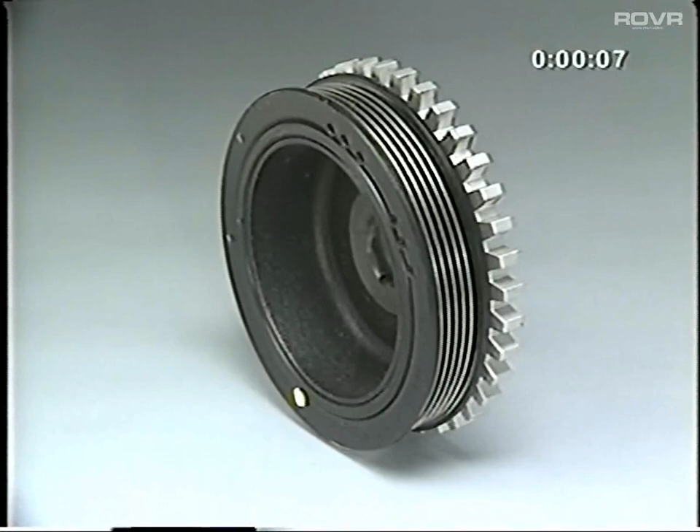The crankshaft damper assembly transmits crankshaft rotation to the serpentine accessory belt. As the damper reacts to the force of the crankshaft driving it in one direction and the load on the belt providing resistance, it tends to flex. To accommodate this flexing, manufacturing tolerances are fairly wide, plus or minus 20 thousandths of an inch in this case. With this much tolerance, a good damper may appear to walk in and out.

This amount of runout is a normal condition for 1996 and earlier 1.9-liter engines. To eliminate belt noise concerns, some techs, noticing the runout and thinking the damper's defective, replace it unnecessarily. Actually, if a belt noise concern exists and damper runout's visible, it's unlikely the two are related.

When diagnosing a belt noise concern on the 1.9-liter engine, first determine which belt is involved. If the belt noise is a squeal or a chirp, it probably originates in the front-end accessory drive system. Check belt tension for a squeal. Check pulley alignment for a chirp.

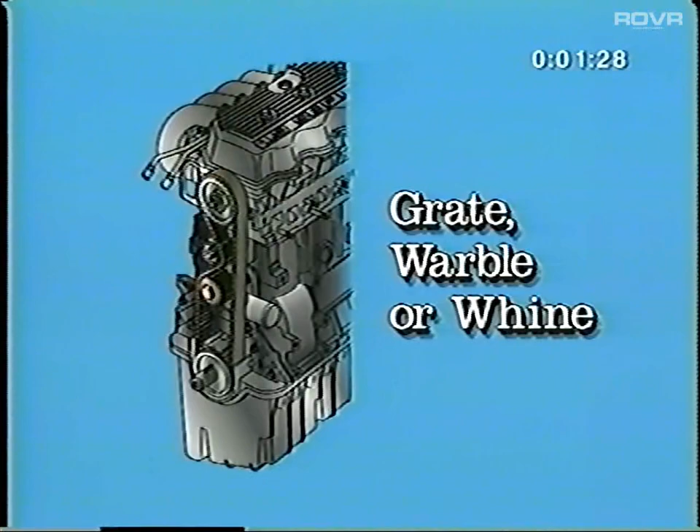If the belt noise is a grating or a warbling sound that's sometimes accompanied by clicks or slaps, or a whine that changes in relation to engine speed, it's more likely due to incorrect timing belt tension. Check the tension of the timing belt. If it requires retensioning, make the adjustment following the procedure in the vehicle service manual. To keep from pre-stressing the belt, be sure the engine's cold and at top dead center before you start.

By the way, if you're sure you're dealing with a belt noise but can't determine which one by the methods we've shown, remove the serpentine belt and run the engine. If the noise is still present, the timing belt's the source. If the noise goes away, it must originate in the front-end accessory drive system.

The timing belt on the 2-liter split-port induction engine may appear to be loose on this side when the engine stops anywhere other than top dead center. Although one might think that this amount of play means the belt needs to be retensioned or that the engine needs to be timed, neither case is true.

If you see this condition when you're servicing the 2-liter split-port induction engine and you haven't done anything to change the timing, ask yourself, was the timing okay before I started the job? If the answer is yes, it's unlikely that the timing's changed. Although it may appear to be loose, the belt is correctly tensioned and retiming the engine is not necessary.

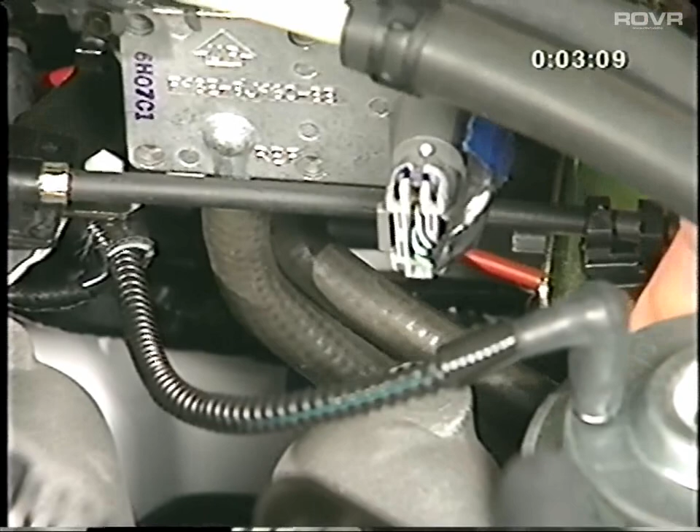The signal hoses that carry exhaust gas to the DPFE sensor have been redesigned due to a noise concern that was associated with the original design. The original signal hoses were ballooning with the exhaust pressure pulses, producing a rattling noise that sounds a lot like an exhaust leak. Typically, it's heard between 2200 and 2500 RPM under load.

New design hoses went into production vehicles on August 15, 1996 to correct this concern, and service parts are available now. If an exhaust system leak cannot be found, the source of the noise may be the original design DPFE sensor hoses. Replace them with the new design service parts, being careful not to switch the lines.

The original design PCV oil separator on the 2-liter split-port induction engine may have flexed when its fasteners were torqued during the engine build process. This flex may have created an engine oil leak. The leak is likely to be detected soon after the vehicle is sold. The customer may say he smelled hot oil or seen smoke from oil dripping on the catalytic converter. The pan rail also may be damp.

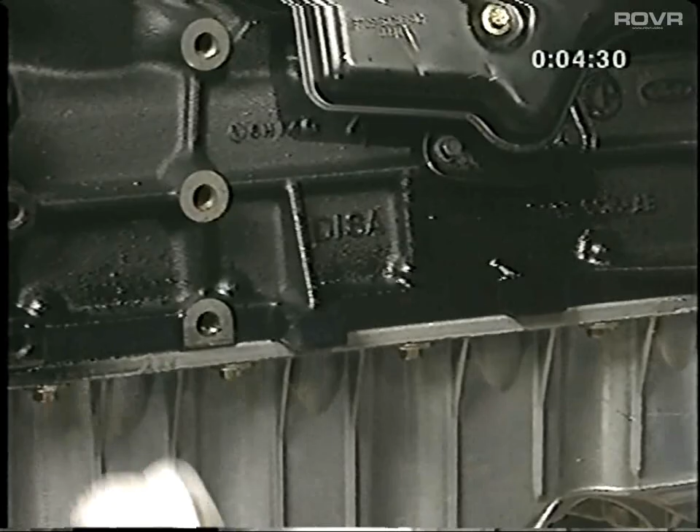The recommended way to verify this concern is to clean the engine around and below the separator. Run the engine until it reaches normal operating temperature. Then view the area with a black light. Because the break-in oil already contains a fluorescent dye, a leak will produce the characteristic fluorescent glow.

The solution to this concern is to either reuse the original part with a new gasket or to replace the part with the upgraded PCV oil separator and a new gasket. In either case, torque the assembly to 8.5 to 11 Newton meters.

The timing chain on the 2.5-liter Duratec engine in the 1995 Contour and Mystique may clatter or rap when the engine is started after a cold soak of 4 or more hours. If the noise is present, it lasts no more than a couple of seconds and has no effect on engine durability.

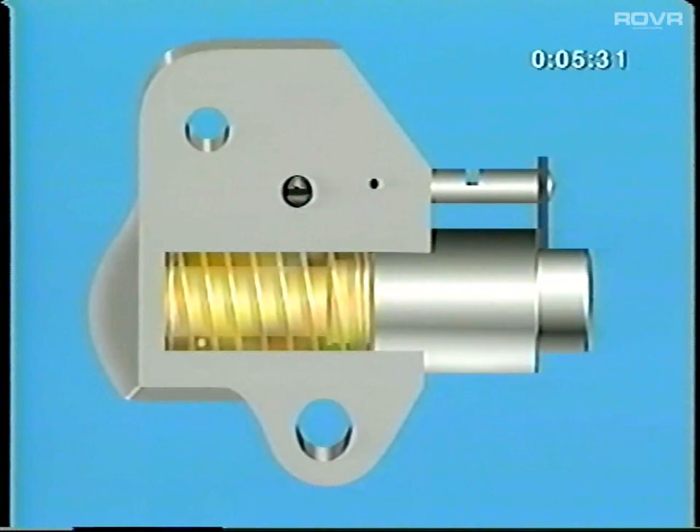The cause of the clatter is oil bleed down from the timing chain tensioners when the engine is off. The noise stops when the tensioners are supplied enough oil to operate normally.

To verify that the concern exists, allow the vehicle to sit for a minimum of 4 hours, long enough for the tensioners to bleed down. Then start the engine and listen for the noise. If it's present, it'll be heard near the front right side of the engine. When the engine's restarted, the noise will not reoccur.

To correct the condition, install the modified 1995 camshaft drive tensioners and adapter plates, and upgrade the entire camshaft drive system to 1996 level components.

The modified design tensioners are 1 millimeter thinner than 1996 level production tensioners to accommodate the thickness of the adapter plates. The cavity machined into the back of these tensioners creates an oil reservoir that retains engine oil after the engine shut off, enabling the tensioners to actuate sooner.

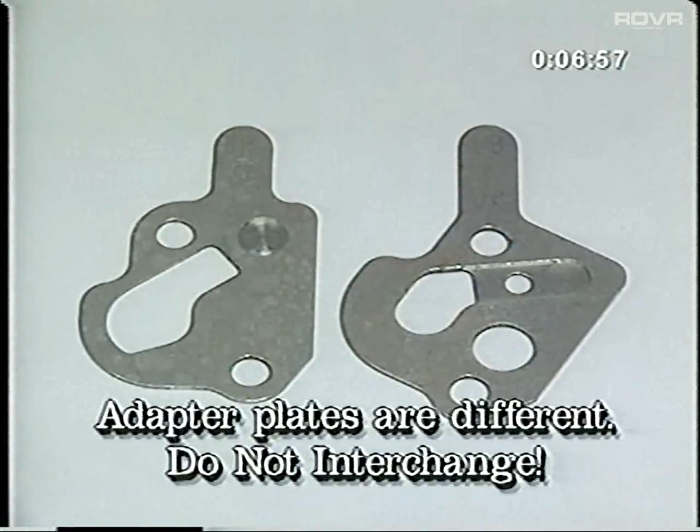To service the concern, refer to TSB Article 962513 and follow the timing chain removal and installation procedures in the 1995 Vehicle Service Manual. Also note that the left bank and right bank adapter plates are different and are not interchangeable. Refer to TSB Article 962513 to ensure correct installation.

To complete the procedure, change the engine oil and filter using Motorcraft filter FL820 or an equivalent. When the FL820S oil filter becomes available in mid-1997, use it instead of the FL820. The new and more durable silicone bypass check valve in the FL820S will reduce the likelihood of the noise coming back between regularly scheduled oil changes. Until the new design FL820S oil filter becomes available, continue using the FL820.

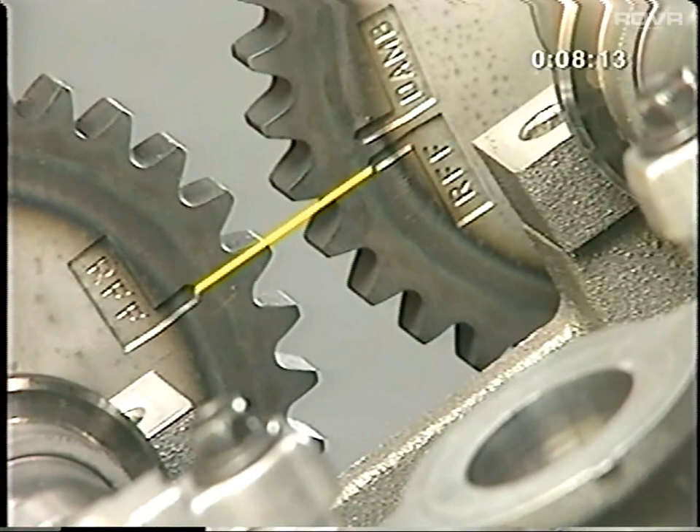The timing marks on the 2.5-liter and 3-liter Duratec engine's camshaft sprockets were changed in mid-1996 from arrows to characters, and from one set of marks to two. When setting the timing on the 2.5-liter or 3-liter Duratec engines, be sure to use the correct marks. The set marked RFF, which stands for Roller Finger Follower, is the current valve train configuration. The other set of characters is for future applications.

Thunderbirds, Cougars, and Mustangs equipped with a 3.8-liter engine and built from Job 1 through January 10, 1996, may weep engine oil around the number 4 front cover to water pump stud. The cause of the leak is the absence of sealant on the end of the stud that threads into the block. If the area around the number 4 front cover stud shows evidence of an engine oil leak, carefully remove the stud, but do not use an impact wrench.

Clean and check the condition of the stud. If it's not damaged, reuse it. If it is damaged, replace it. Apply thread sealant D8AZ19554A with Teflon to the stud and install it in the block, tightening it to 8 to 12 Newton meters, or 71 to 106 pounds inch.

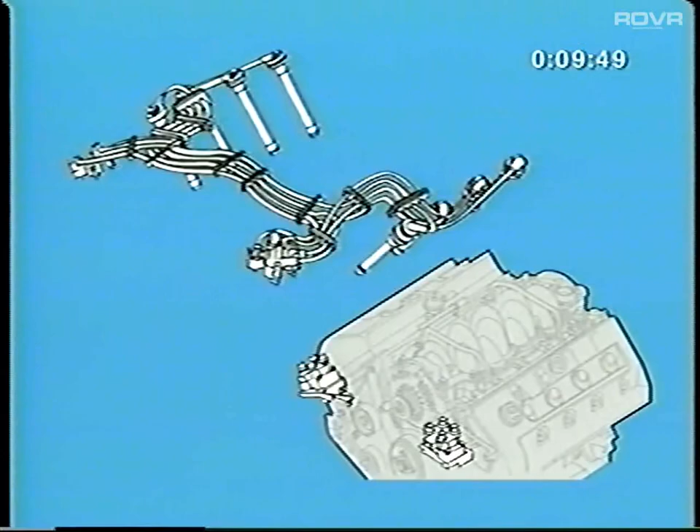The 4.6-liter 4-valve engine in the Mark VIII has changed to a coil-on-plug ignition system for 1997. The coil-on-plug system uses a separate coil to fire each spark plug on the compression stroke only. This design eliminates the coil pack and spark plug wires which are present in conventional distributorless ignition systems. By simplifying the system, Ford engineers have enhanced its reliability, reduced its weight, and improved its appearance.

With the new system come new diagnostic procedures. Although these are thoroughly covered in the PCED manual, here are some key points. If the PCM detects a misfire and identifies the specific cylinder where it occurs, it will set a misfire continuous memory code for that cylinder.

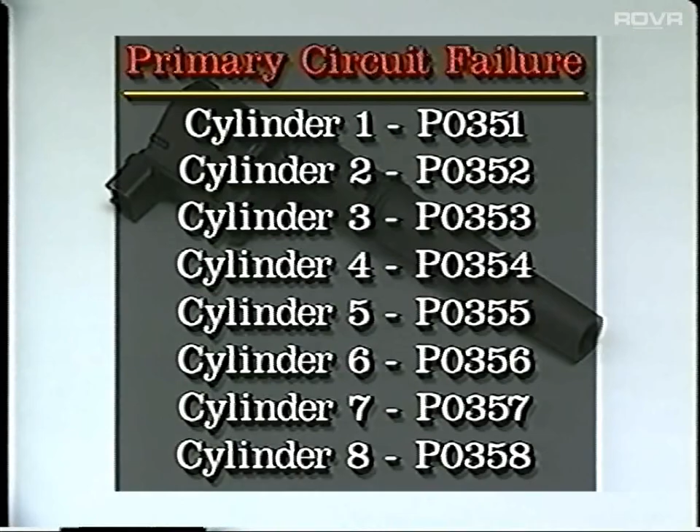These misfire codes are numbered P0301 through P0308 for the 4.6-liter 4-valve engine. If the misfire condition is random and the PCM is unable to specify a cylinder, it'll set the system misfire code P0300. The PCM also will set a separate primary circuit failure continuous memory code for any coil it determines is faulty.

These codes are numbered P0351 through P0358 for the 4.6-liter 4-valve application. The PCM will set a P0350 continuous memory code if it detects a random primary circuit failure but has not identified the specific coil.

By specifying the cylinder where a misfire has been detected or the coil that exhibits a primary circuit failure, the PCM simplifies diagnosis. The pinpoint tests in the PCED manual are written to walk you through coil-on-plug system concerns in a logical manner, whether you're dealing with a system code or a specific component.

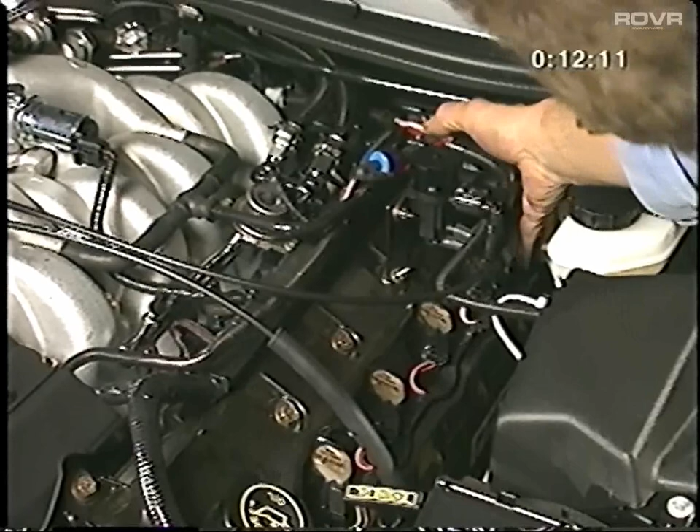For example, for diagnostic trouble code P0350, the system code for an ignition coil primary circuit malfunction, you're directed to start your diagnosis by checking the components that have the highest probability of creating the concern. These include checking the coil and boot for insulation damage, looseness, or shorting, checking the condition of the spark plugs for damage, wear, carbon deposits, and gap, and checking the wiring harnesses for damaged, burned, or overheated insulation, damaged pins, and loose or broken connectors.

If the root cause of the concern is located among these items, the defective component is repaired or replaced. The PCM is reset, and a quick test is rerun to verify the repair. If the root cause originates elsewhere, the pinpoint tests direct you to check the coil driver line and the battery line for opens and shorts, and so on, until the root cause is pinpointed and repaired.

In this segment, we'll demonstrate the correct cam timing procedure for the 5.4 and 6.8-liter engines. This procedure can be performed at the bench during a rebuild or in the vehicle after the oil pump or one or both cylinder heads have been removed. A critical requirement of this procedure is keeping the camshafts and the crankshaft in the correct relationship at all times. By performing the procedure exactly as we demonstrate, valve train or piston damage can be prevented.

Before we start, here are a couple of tips that will help make sure the job's done right the first time.

When you're ready to install the timing chains, you may find that the copper links are discolored or hard to identify. To work around this concern, here's a way to make sure the chains are installed correctly. Stretch the chain out, placing a single link in a vertical position at one end. The opposite two links will be horizontal. Mark all three with a marking pen. The single vertical link will be aligned with the crankshaft sprocket timing mark. The two horizontal links will be aligned with the camshaft sprocket timing mark.

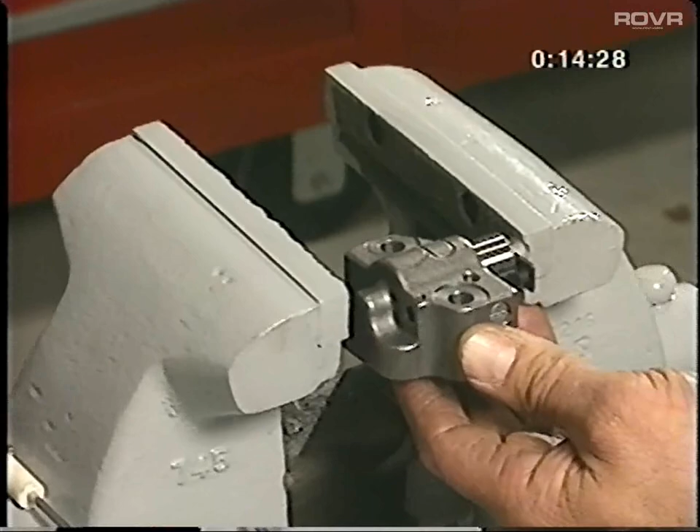With the hydraulic tensioner positioned between the jaws of a vise, but with the ratchet arm located safely outside the jaws, compress the tensioner plunger. Then, using a small screwdriver or a pick, push back and hold the ratchet mechanism. While holding the ratchet mechanism, push the ratchet arm back into the tensioner housing and install a paper clip or a similar type of pin into the hole in the tensioner housing to hold the ratchet assembly and plunger in during installation. Remove the tensioner assembly from the vise. Repeat this procedure for the other hydraulic tensioner.

Before installing the cylinder heads and camshafts, position the crankshaft keyway at the 12 o'clock position. By doing this, all of the pistons will be below the deck face, allowing you to rotate camshafts later without damaging the valve train or pistons.

After installing and torquing the heads, loosely install the camshaft holding tools on both camshafts. Using the camshaft positioning tool, position the left cam sprocket timing mark roughly at 12 o'clock and tighten the camshaft holding tool. Position the right cam sprocket roughly at 11 o'clock and tighten the holding tool. If the camshaft holding tools are not locked while the timing chains are installed, valve spring tension could cause one or both sprockets to jump time after the chains are installed.

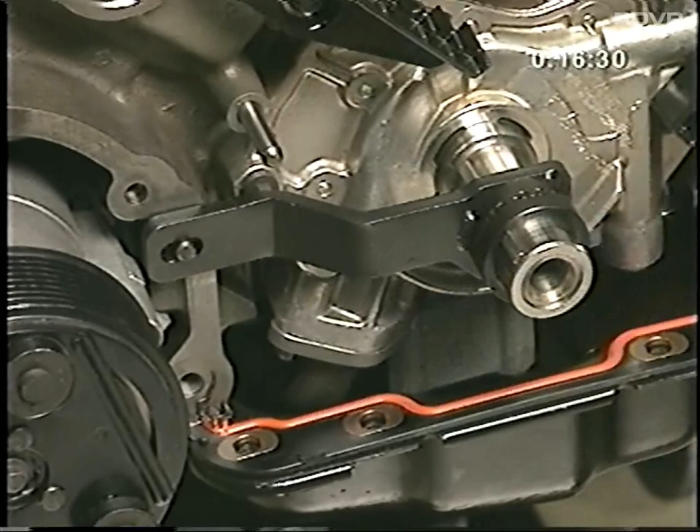Next, install the crankshaft tool by sliding it on the keyway. Then install 2 or 3 flywheel bolts in the crankshaft rear flange and, using a pry bar, rotate the crankshaft 1/4 turn only in a counterclockwise direction as viewed from the front of the engine. Stop rotating the crankshaft when the slot in the crankshaft tool is aligned and fits over the dowel on the block. If the crankshaft is rotated more than 1/4 turn in the direction shown, or if it's rotated in the opposite direction, piston and valve train damage will occur.

Remove the crankshaft tool, but don't disturb the crankshaft position from this point on. Next, position the inner crankshaft sprocket on the crankshaft with the long hub out.

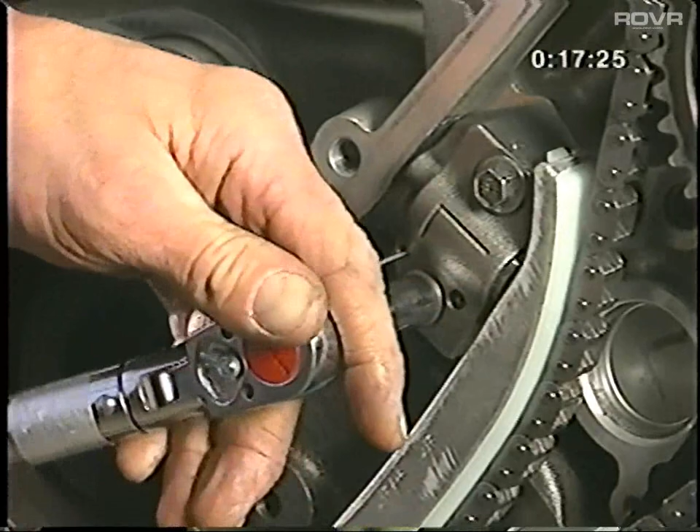Install the left-hand timing chain on the left camshaft sprocket, aligning the single copper link with the timing mark of the crankshaft and the two copper links with the camshaft sprocket mark. When the left-hand timing chain is correctly installed, the upper half of the chain will be located below the tensioner guide dowel, and the timing marks will be aligned with the appropriate copper links in the timing chain. To complete this side, install the timing chain guide and the hydraulic tensioner.

Now, without changing the position of the crankshaft, install the outer crankshaft sprocket with the long hub facing in. Install the right-hand timing chain, again aligning the three copper links with the timing marks, and be sure the bottom half of the right-hand timing chain is installed above the dowel. After installing the timing chain guide and the hydraulic tensioner, remove the camshaft holding tools.

Check your work. Verify that all timing marks are properly aligned and turn the engine over a couple of times. This will ensure that the timing chains haven't jumped the sprockets and that the engine isn't binding or sticking.

Intake manifold runner control systems are popular with our customers for the enhanced engine performance they deliver. For this and other reasons, more engines are being upgraded to electrically controlled IMRC systems, including the 1997 2.5-liter Duratec in the Contour and Mystique and the 4.6-liter 4-valve engine in the Mark VIII.

The PCM controls IMRC actuation based on engine speed and throttle position. The IMRC valve plates typically remain closed at engine speeds below 3,000 RPM to improve low speed and cold engine performance. They typically open at engine speeds above 3,000 RPM to improve high-speed engine performance.

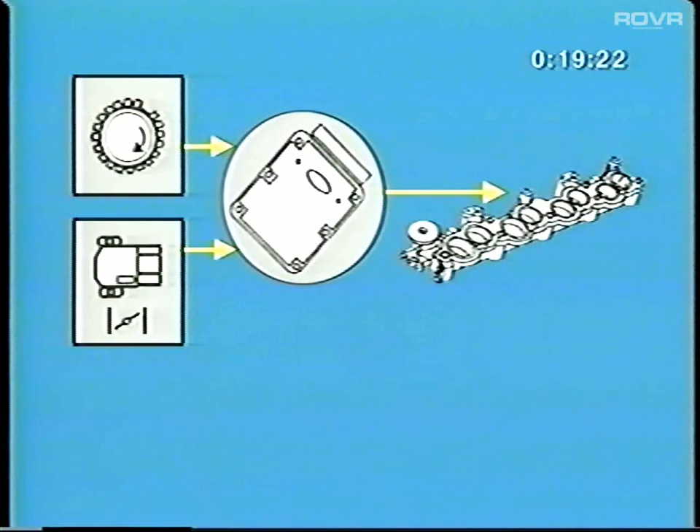Because an IMRC that fails to function correctly may adversely affect emissions, it is subject to OBD2 requirements. For this reason, the IMRC is equipped with an internal monitor switch that provides feedback to the PCM. Diagnostic trouble codes will set, and the malfunction indicator lamp will illuminate if the PCM detects the valve plate stuck open or stuck closed. Other diagnostic trouble codes will be set, but the MIL will not light if an open or short is detected in the IMRC circuitry or if the monitor switch signal is out of range.

In addition to the change to an electrically actuated IMRC, the 1997 Mark VIII is equipped with a center entry throttle body. It's similar to the throttle body on the 4.6-liter four-valve engine in the Mustang. To learn more about the intake manifold runner control and other intake air systems and how to diagnose concerns related to them, refer to the system descriptions and pinpoint tests in the PCED manual.

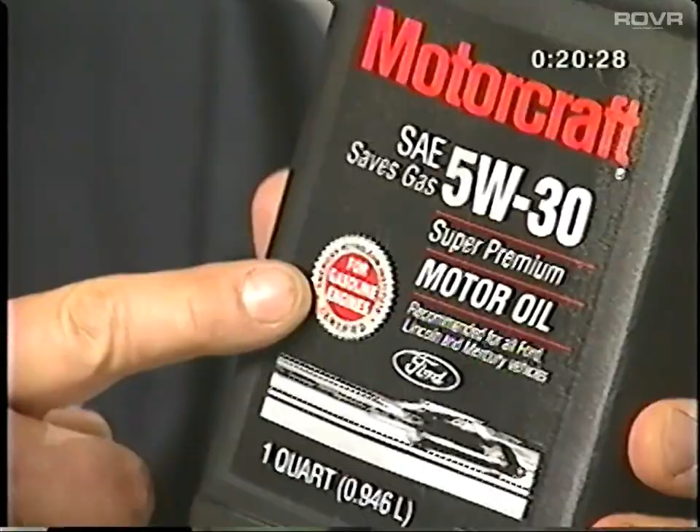The hurdle that petroleum refiners must meet to earn the API certification mark has been raised. The combination of tougher standards plus new refining technology is resulting in the production of base oil stock that's so pure, it's as clear as water.

The impurities which are present in conventional refined base oil stock cause lubricants to degrade. By removing the impurities, refiners have developed petroleum-based lubricants that exhibit synthetic-like characteristics. When blended with the required additives, the base oil stock takes on the color, texture, and smell of conventional lubricants.

The standards the new engine oils must meet include improved fuel efficiency, resistance to foaming, improved low temperature viscosity, improved volatility, and emission system protection. To make sure you're getting the best oil for your engine, insist on a product that carries this certification mark.

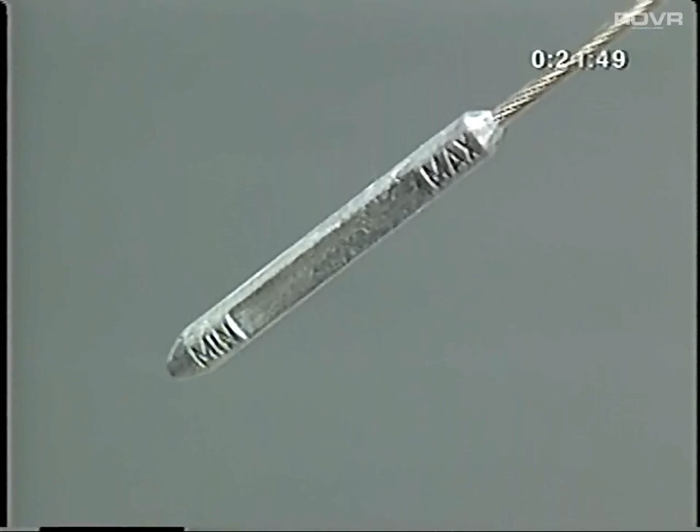Ford is standardizing the markings on its engine oil dipsticks. Although there are several styles now, there'll be just one in 1999. The new dipsticks have min and max markings only. When the oil level is at the min mark, only 1 quart can be added. If the oil level is between the marks, oil should not be added.

Adding oil when the level falls between the min and max marks may overfill the crankcase, causing foaming and potential camshaft bearing damage. When you're checking the oil on an engine equipped with a cable and bullet dipstick, wipe it thoroughly, especially the flat area. Although some oil will adhere to the outside of the bullet when you withdraw the dipstick, the marked flat surface will be partially dry.

The new min and max marked dipsticks were introduced on the 2-liter Zetec and the 2.5-liter Duratec engines in Contour and Mystique for 1995. You'll find them in the 1996.5 5-liter Explorer engine and in the 1997 4.6-liter 2-valve engine in the Crown Victoria, Grand Marquis, and Town Car.

Although the cooling systems for the 2-liter Zetec and the 2.5-liter Duratec engines don't appear much different than the conventional systems we grew up with, they are unique. Each is an example of a DeGas system, a design that's fully pressurized, including the coolant recovery or DeGas bottle.

To help you understand how a DeGas system differs from a conventional cooling system, two things need to be cleared up. The first is how the system removes air from the coolant. The second is the misconception that the DeGas bottle is merely an overflow container.

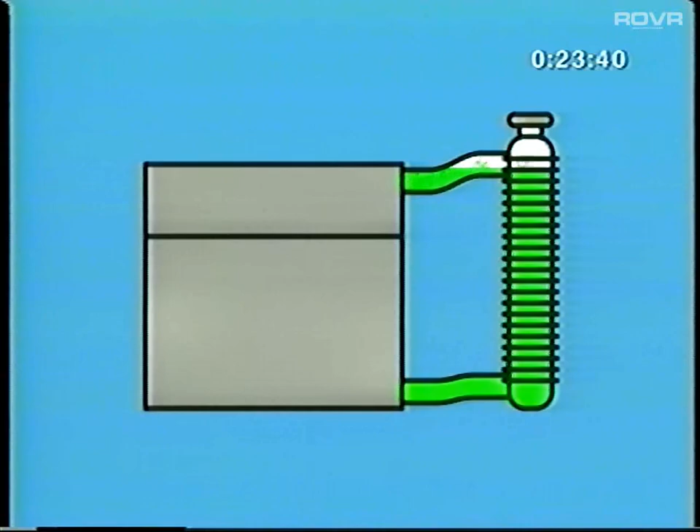When the top of the radiator is the high point in the cooling system, air bubbles in the coolant collect there and vent through the cap. In many of today's vehicles, however, some of the coolant passages in the engine are higher than the radiator. If there were no way to remove air from the engine, it would be trapped, reducing cooling system efficiency.

The DeGas system gets the bubbles out by continuously purging air from the cylinder block and circulating air-free coolant back to the engine. This promotes effective cooling by keeping a solid wall of coolant in contact with the cylinder walls at all times.

A conventional overflow system only works when the engine's off, allowing hot liquid to escape from the radiator and return when cooled. None of this back and forth flow takes place in a DeGas system. The DeGas bottle is an integral part of the cooling system while the engine's running. The coolant must flow to the bottle to release air bubbles before it's permitted to re-enter the coolant stream.

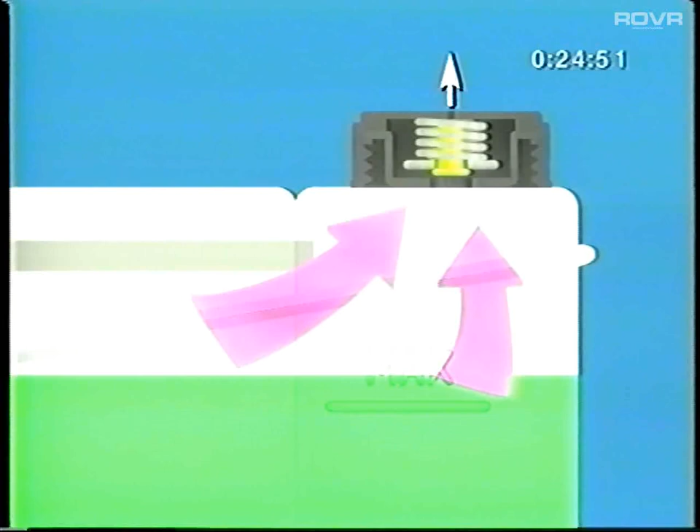Immediately after the engine shuts off, coolant temperature spikes briefly. The added system pressure opens the pressure valve in the fill cap and vents air to the atmosphere. As the coolant temperature drops, the air pressure in the DeGas bottle decreases. In response, the greater pressure outside the bottle forces air into the bottle through the vacuum valve in the fill cap. To operate correctly, the DeGas system requires this cushion of air above the coolant.

If the bottle's overfilled, liquid may vent after the engine's shut off. If the level's too low, overheating concerns may develop. When servicing a DeGas system, be sure to heed the warnings in the vehicle service manual. The coolant is extremely hot, as high as 230 degrees Fahrenheit at the DeGas bottle.

To prevent cooling system concerns, be sure the coolant level is between the min and max marks when the engine's cold. Tighten the fill cap to 4 Newton meters torque. That's hand tight. A loose cap may be the cause of an overheat concern. And verify that the fan works properly at both low and high speeds.

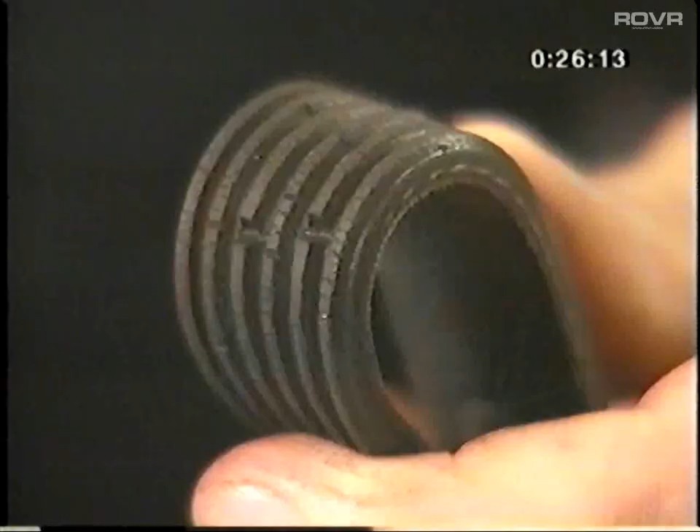Serpentine accessory belts are often replaced when they have plenty of life left in them. Here are some tips to help you determine when a belt should be replaced. Do not replace belts that have cracks across the ribs. Although the cracks may appear at less than 50,000 miles under severe operating conditions, they neither weaken the belt nor interfere with its performance.

Do replace a belt if it's missing chunks of rib material as long as 5 millimeters or 19/100ths of an inch. These are signs of belt failure. When in doubt, check the belt cracking, chunking, and wear guidelines in the vehicle service manuals.

The 1997 E4OD automatic transmission features a number of changes. The first of these is a cooler bypass valve, or CBV, that's present on F-150 and F-250 light trucks under 8,500 GVW, and on all Expedition and Econoline equipped with E4OD transmissions. The cooler bypass valve was added to achieve faster fluid warm-up during cold weather operation.

Although some of the transmission fluid still travels to the cooler, a portion is diverted back into the unit by the cooler bypass valve, helping achieve faster warm-up. When servicing the valve, follow the procedures in the vehicle service manual. The CBV assembly should be removed and backflushed during an overhaul to remove contamination.

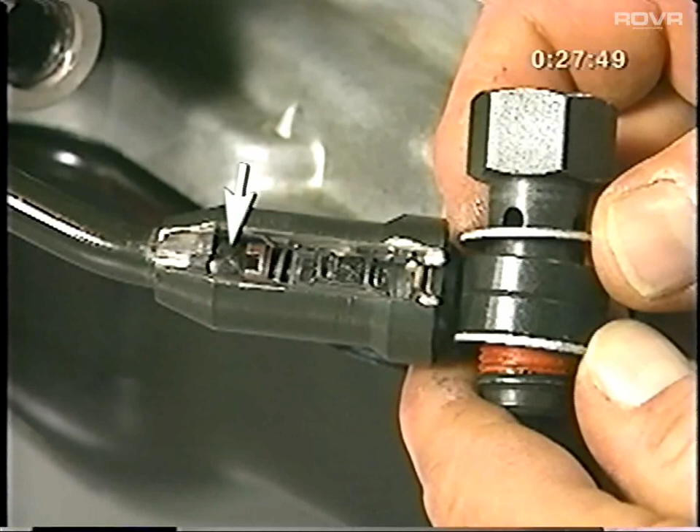To overcome the tension of the internal check ball and allow fluid to pass through the valve, regulate solvent pressure to at least 344.75 kPa or 50 psi.

Also note that the rubber-coated aluminum sealing washers can fall off the valve. Clean and inspect these washers and replace them if they're damaged. Avoid over-tightening the fittings when reinstalling the valve on the transmission. Over-tightening can damage the rubber-coated washers and may strip the case threads.

If replacement of the entire CBV assembly is required, remove the O-rings and shipping caps before installation. Another change that applies to all 1997 and some late 1996 model applications is the number 10 thrust bearing and forward ring gear hub.

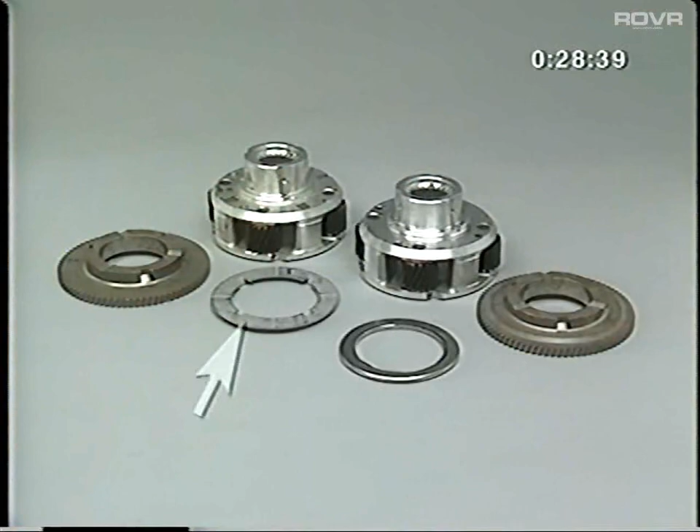The thrust washer that was present between the forward planet assembly and the forward ring gear hub in past units has been replaced with a needle bearing. To accommodate the needle bearing, the forward ring gear hub was changed as well. The slots in the forward planet carrier that held the thrust washer in place were also removed.

When servicing these components, Service Kit F7TZ-7B067AB can be used. This kit contains one number 10A needle bearing, one mating forward ring gear hub, and an instruction sheet. Make sure both parts in the kit are used. Old and new design components cannot be mixed. This kit, which should be available soon, will service any E4OD transmission regardless of which forward planet carrier design is used.

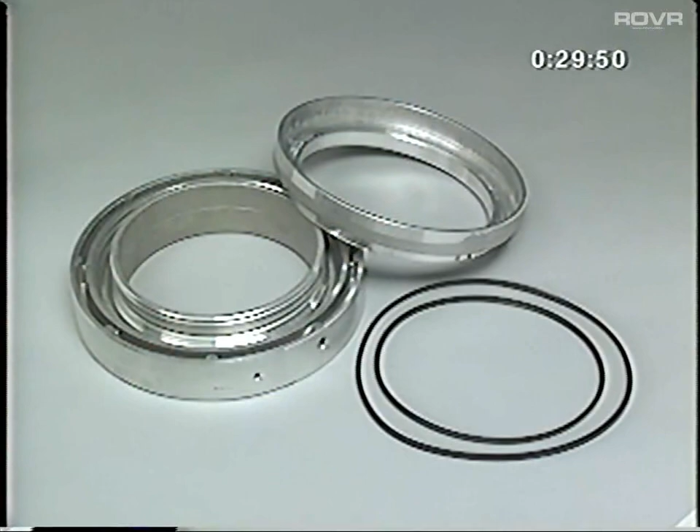Another across-the-board change for 1997 is a new design overdrive piston and cylinder. This change will occur as a running change sometime during the 1997 model year. In past models, the piston had separate inner and outer lip seals. The new design has a one-piece seal that is bonded to the piston. The cylinder design changed to accommodate the new piston design.

Avoid mixing parts when servicing the overdrive clutch. The old design and new design pistons and cylinders are not interchangeable. Refer to TSB Article 962115 until these changes are fully incorporated into the 97 models.

Some 1997 E4OD transmissions and a small number of 1996 units contain a new design overdrive ring gear and retaining rings. This also will be a running change sometime during the 1997 model year. The thick center shaft retaining ring is replaced with a thin wave ring. The thick one-way clutch retaining ring is replaced with a thin flat ring. The new ring gear has a lead-in chamfer to simplify center shaft installation.

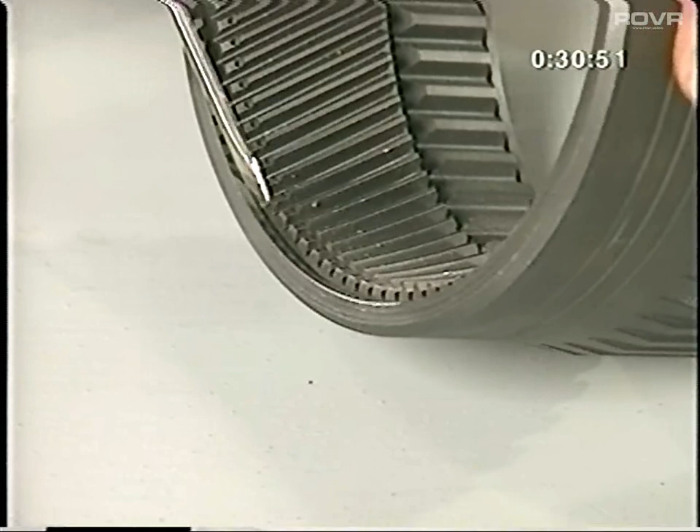Refer to TSB Article 962117 until these changes are fully incorporated into the 97 models. To prevent misbuilds when any one of these components needs to be replaced, replace all three components with the correct current level parts. The new ring gear, when purchased, will come with the new style retaining rings. Make sure the rings are properly seated in the grooves, otherwise a repeat repair will occur.

Another change to many 1997 E4ODs is the presence of a digital transmission range sensor and accompanying changes to the manual shaft and outer lever. The digital TR sensor will not retrofit to prior model year transmissions. The new one-piece manual shaft and outer lever, although similar to the 89 through 92 style, is not interchangeable with them.

The E4OD changes we just covered are also presented in the program booklet. The application chart shows which of the enhancements is present in applications based on gross vehicle weight and vehicle line. Refer to the booklet when you're servicing a 97 E4OD to avoid misbuilds.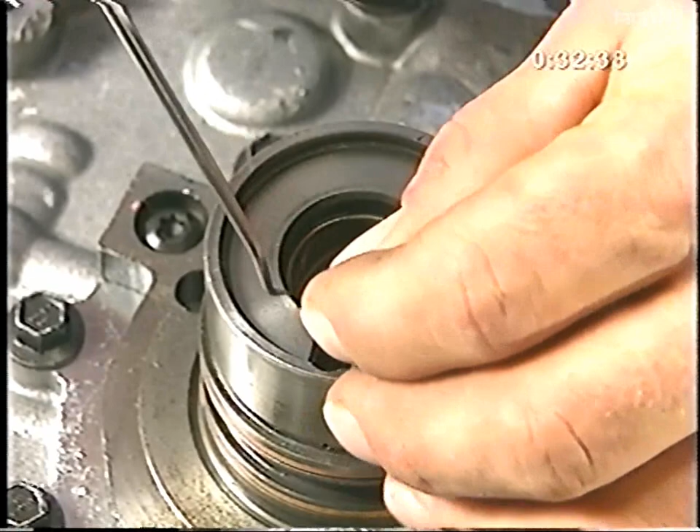To complete the discussion of the E4OD, here are several reminders about topics that recently appeared as TSB articles. E4OD transmissions are equipped with a converter drainback spring and stop assembly in the stator support of the pump control body. This spring and stop assembly must be replaced during an overhaul. Failure to do so may lead to a repeat repair.

The spring can act like a filter, trapping contaminants suspended in the fluid. With enough buildup, the flow to the coast and overdrive systems may be restricted. Symptoms include heat distress on the overdrive planetary gear set, the coast clutch cylinder bushing, or the overdrive cylinder bushing.

The converter drainback spring and stop assembly and the required orifice cup plug are currently available in kit number E9TZ-7H132B. It will also be added to the E4OD soft seal kit part number FOTZ-7153A in the near future.

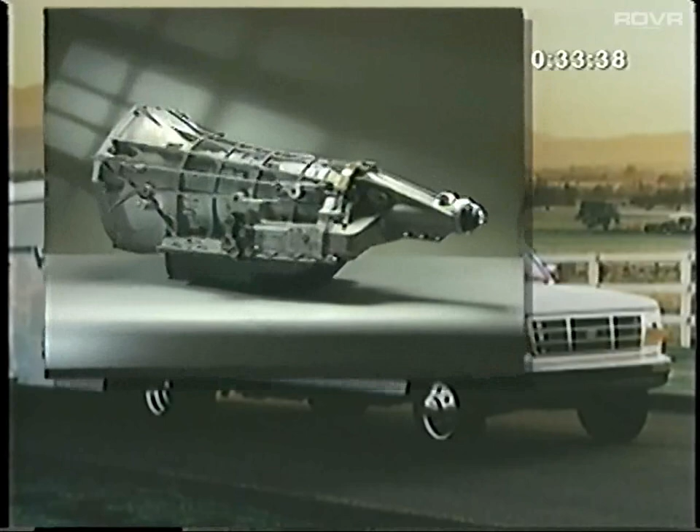E4OD transmissions built after August 7, 1995 contain a new design intermediate band apply servo assembly, part number F6TZ-7D021A. The new assembly will service all past and current E4OD transmissions.

When the intermediate band apply servo assembly needs to be replaced, exercise caution to prevent mixing parts. To use the old design in a new transmission, the case must have a groove for the retaining ring. If there is no retaining ring groove in the piston bore, only the new design assembly can be used.

When replacing the old design with the new assembly, do not reuse the old retainer and retaining ring. They're not needed. To remove the new design, gently tap on the piston rod protruding from the top of the piston with a rubber or plastic mallet. The spring load from the tap will pop the servo assembly up enough to be removed.

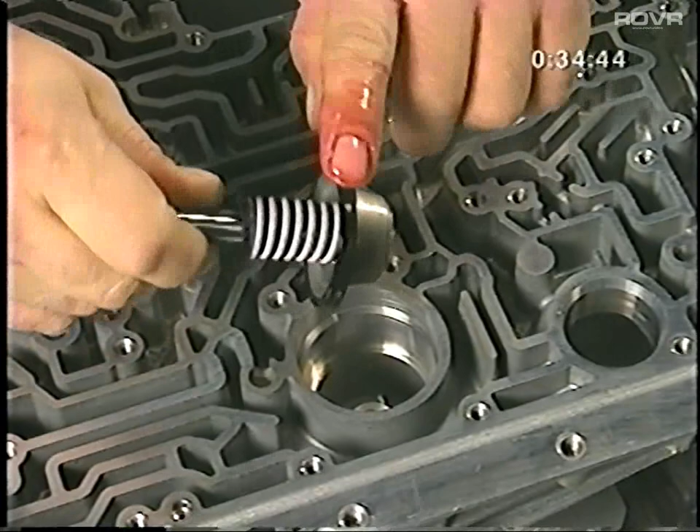To install the new design, lubricate the piston seal with transmission fluid and slide the servo assembly into the case bore until the assembly is just below the top of the bore.

TSB Article 96728 provides information that will assist you in selecting the correct components when servicing the reverse clutch piston.

The 1996 model year changes included the addition of a wave plate spring to the reverse clutch pack, a change in the depth of the reverse clutch piston to accommodate the wave plate spring, a change to the retainer and spring assembly also to accommodate the wave plate spring, and a change to the inner and outer piston seals from square cut to lip seals. These parts are not interchangeable with past models due to accompanying calibration changes.

To prevent a misbuild when replacing any reverse clutch component, refer to the part usage chart in TSB Article 96728 or in the program booklet.

The 1997 CD4E transaxle contains a new crimp nut designed park lever assembly and a redesigned park pawl ratchet spring that's blue in color. The new ratchet spring can only be used with the new park lever assembly.

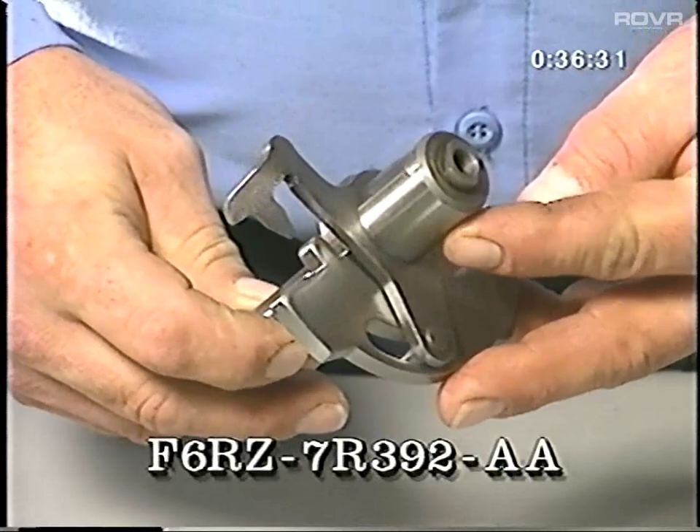If the park lever assembly in a 1997 CD4E transaxle needs to be replaced, install the crimp nut design assembly, part number F6RZ 7R392AA. The components that comprise the assembly cannot be ordered individually.

If the spring also needs to be replaced, install the blue park pawl ratchet spring, part number F7RZ 7A180AA. These components will not retrofit to earlier model year CD4E transaxles, nor will earlier model components function correctly in a 1997. Additional information on this topic is included in the booklet that accompanies this tape.

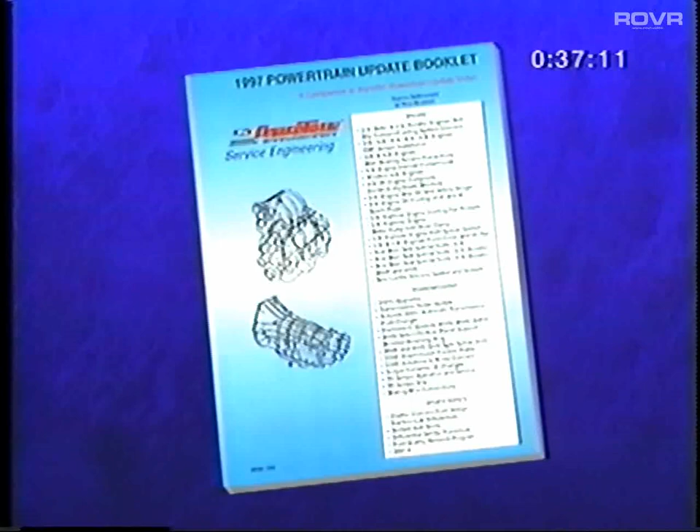Also beginning with the 1997 model year, the CD4E transaxle contains a new design main control assembly, part number F7RZ 7A100AA. This new design includes a new intermediate overdrive accumulator valve plug, but is no longer equipped with a pull-in control valve, spring, and retaining plate.

If replacement of the main control assembly is required on a 1997 CD4E transaxle, service it with the new design assembly only. This assembly cannot be used on earlier model year vehicles because it's also accompanied by changes to the intermediate overdrive servo assembly and PCM.

The CD4E in the 1997 Probe contains a new design one-piece intermediate overdrive servo piston and rod assembly and a redesigned intermediate overdrive servo piston return spring assembly that's green in color.

If the intermediate overdrive servo piston and rod assembly in a 1997 CD4E transaxle requires replacing, service it only with the new design select fit piston and rod assembly. Instructions for determining the correct select fit assembly are provided in the program booklet.

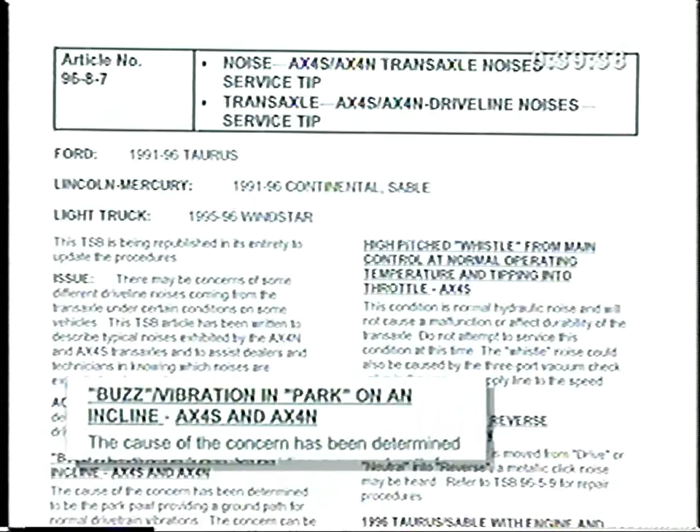Although some driveline noises are symptomatic of component failure, wear, or misadjustment, others are normal. The customer needs to know that. TSB Article 9687 describes noises which may be exhibited by AX4S and AX4N automatic transaxles. It was published to help you know which noises are normal and are to be expected.

We've reprinted TSB Article 9687 in the booklet that accompanies this tape and added another noise concern too, a clunk in Windstar vehicles. The clunk may be heard when the transaxle is shifted out of park when the vehicle's parked on an incline. The clunk occurs when the weight of the vehicle is taken off the park pawl.

To learn more about servicing AX4S and AX4N noises, refer to TSB Article 9687 and the program booklet. You'll find that a number of noises are either normal or should not be serviced at this time.

A number of 4x4s equipped with AODE, 4R70W, C6, or E4OD automatic transmissions may develop a transmission fluid leak from the extension housing into the transfer case due to the failure of the original transfer case input shaft seal. To see which vehicles may be affected by this concern, check the list in the program booklet.

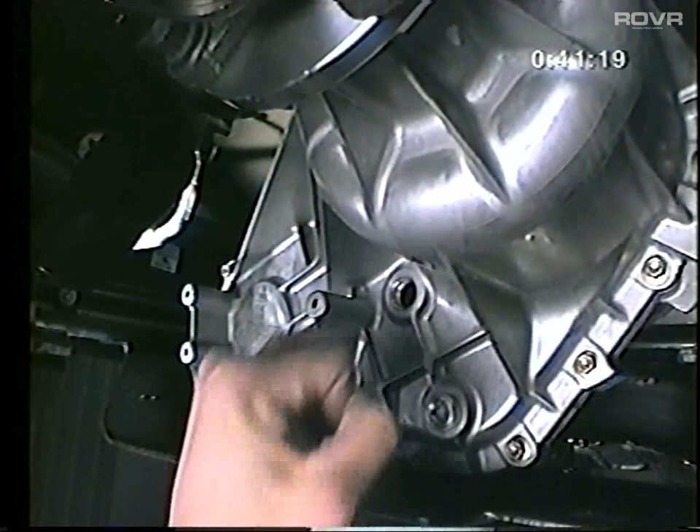The customer may report a drop in transmission fluid level or shift or engagement concerns. To diagnose the concern, check the fluid level in the transmission. If the fluid's low and there are no visible leaks, check the transfer case fluid level. It should be just below the fill plug hole.

If the transfer case is over full and the transmission fluid's not burnt, remove the transfer case and install the new double lip design seal, part number F77Z 7B215AA. Loctite's not required with this seal.

If the transmission fluid is burnt, repair the transmission as required and then replace the transfer case input shaft seal. When finished, adjust the fluid levels in both the transmission and the transfer case.

A new case and main control are available to service certain 1992 through 1995 AODE and 4R70W automatic transmissions. When servicing an existing unit with either a new case or a new main control, the correct pilot sleeves and bolts must be installed to prevent a misbuild.

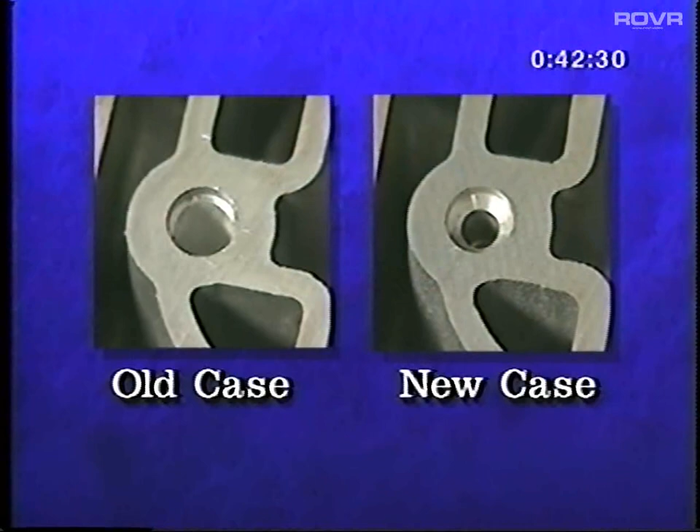The new transmission case pilot holes are smaller to match the smaller pilot bolts used in the new service main control. When replacing only the case and reusing the original main control, replace the original pilot bolts with small-tipped N808962S bolts and gasket number F6AZ-7C155A.

Use the large-tipped pilot bolts to assemble the main control. They align the separating plate and the valve body gasket. After the main control is assembled, remove and replace the large-tipped pilot bolts with the new bolts. The reinforcing plate and separating plate bolts will keep the components aligned.

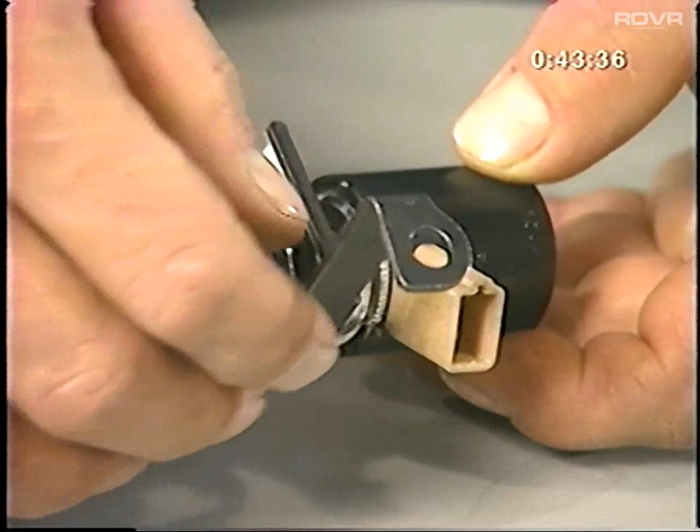When replacing only the main control and reusing the case, install sleeves F6AZ-7K720A in the main control pilot holes. And remember to install the new EPC solenoid retainer, part number F6AZ-7H111A. The necessary parts are all listed in the parts catalog.

1997 F-150 4x2s equipped with 4R70W transmissions may develop a transmission fluid leak from the extension housing to case joint when equipped with the original paper gasket. The leakage may be misdiagnosed as a fluid pan gasket leak and lead to unnecessary pan gasket replacement and a repeat repair.

The cause of the concern may be the load that's placed on the extension housing to case joint by this exhaust system bracket. When servicing a vehicle for this concern, replace the original gasket with the new steel-backed gasket, part number F6AZ-7086A. The silicone bead around its edge provides improved sealing.

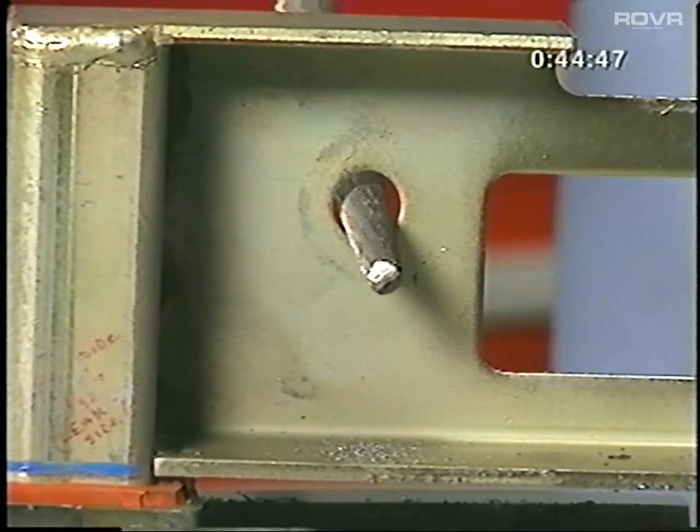To avoid preloading the extension housing to case flange joint and provide clearance for the extension housing mount bolt installation, you can enlarge these holes as much as 1/8 inch at the front and rear before installing the bracket. When reassembling the bracket, tighten the nuts on the exhaust system end first. Then install and tighten the through bolts to the extension housing mount flange.

Due to a limited supply of service main controls for the AODE automatic transmission, you may be unable to obtain the valve body that's specified for the unit, part number F2UZ-7A100A. If you must replace the main control on a 1992 or 1993 5-liter Econoline, install the F-Series valve body, part number F1TZ-7A100B, to prevent a vehicle down concern.

Make sure to use the correct gasket, since using the wrong one may cause shift concerns or damage the transmission. Using this alternate main control on the AODE may result in busy shifts or early 3-4 or 4-3 shifts. If you notice these symptoms when you test drive the vehicle after making the repair, inform the customer and arrange for a callback when the correct part's available. Also be sure to have the original main control shipped to the Ford Quality Renewal Center. The address is provided in the program booklet.

Ford introduced a new 5-speed automatic overdrive transmission at the start of the 1997 model year, the 5R55E. It's paired with 4-liter engines in the Ranger, Aerostar, and Explorer, replacing the 4-speed 4R44E. The 5R55E is the first 5-speed automatic transmission in a compact truck. It's built to last, and it provides improved acceleration and off-road operation, as well as a 500-pound increase in trailer towing capacity.

As the gear ratios show, Ford engineers split the difference between the 4-speed's first and second gears to create the 5R55E's new second gear. This means that shifts are smoother for greater operator satisfaction and transmission durability is enhanced. The 5R55E and the 4R44E share many of the same components. In fact, the two are almost entirely compatible. For example, both are factory filled with a new transmission fluid.

The service version of this fluid is Mercon 5. Mercon 5 is currently approved for use in the 1997 4R44E and 5R55E, and engineers are currently advising against mixing it with regular Mercon automatic transmission fluid or using it in other transmissions or transaxles. Under normal duty conditions, Mercon 5 is a fill-for-life fluid. Under severe duty conditions, it should be changed at 50,000-mile intervals.

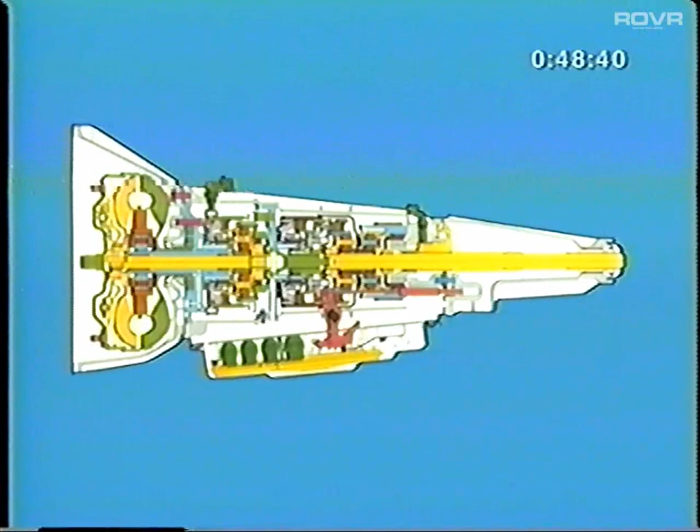Mercon 5 has improved viscosity to better protect the internal components of the transmission. It flows faster at low temperatures for better cold weather operation. And it's formulated to protect the 4R44E and 5R55E friction clutches, needle bearings, and gears.

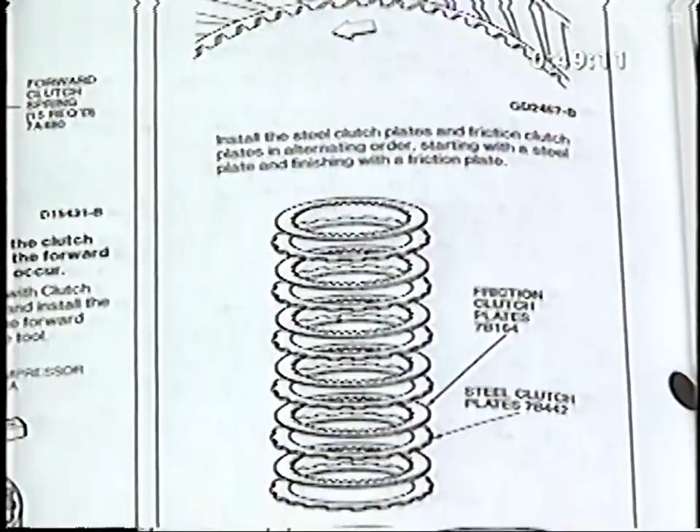The 4R44E and 5R55E also are equipped with directional coast clutch, direct clutch, and forward clutch friction plates. The grooves control fluid flow across the plates, reducing heat buildup and extending clutch life. When the friction plates are serviced, they must be oriented correctly to prevent transmission damage. Installation instructions are provided in the vehicle service manual. These directional friction plates are not compatible with past model year transmissions.

Both units also are equipped with the new digital transmission range sensor. This is a topic we'll cover in greater depth a little later in the video.

The 1997 4R44E and 5R55E are equipped with new design solenoids. These solenoids produce a significant current change when they move. This current change, which we refer to as an inductive signature, informs the PCM that the solenoid responds mechanically when it's turned on and off. If the PCM does not see a current change when it commands a solenoid to move, it sets a diagnostic trouble code. The solenoids affected by this change include all shift solenoids, the torque converter clutch solenoid, the electronic pressure control solenoid, and the coast clutch solenoid in the 4R44E only.

The new design solenoids are not interchangeable with past model year transmissions.

Prior to the 1997 model year, the fluid pump stator, the center support, and the forward clutch were equipped with bushings. For 1997, these bushings are replaced with needle bearings. The 1997 parts and those they mate with are not compatible with the earlier designs. The rear case bushing also is replaced with a new design needle bearing.

If the rear case needle bearing needs to be replaced, remove it using the bushing remover. When installing the new needle bearing, orient the gold ring toward the tool and use the new design installer. It seats the bearing to the proper depth.

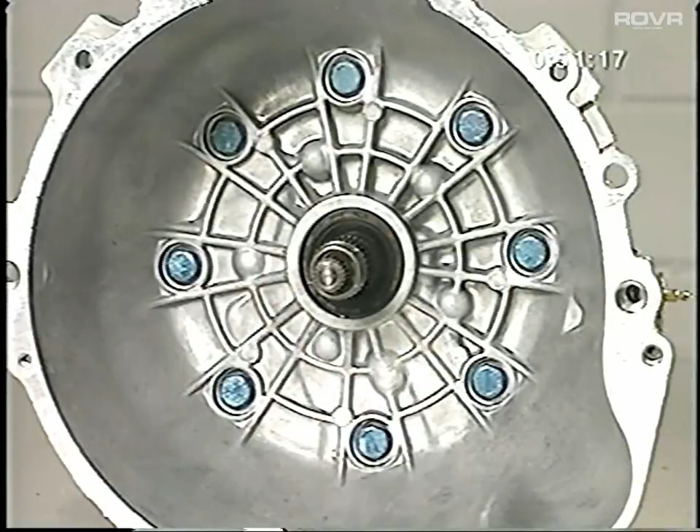Another change for 1997 is the presence of a new design converter housing hub seal that does not require staking. To install this seal, use the new converter hub seal installer, part number T97T77000A. When servicing past model hub seals, check the converter housing for a step. Use only the stepped staked seals on housings with the step. Always service the converter with the same type seal that was removed.

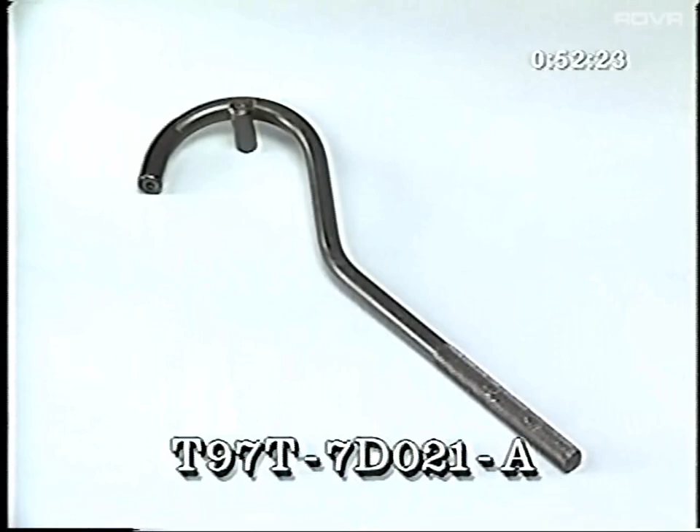The front servo assembly in the 5R55E is a new design, and a special tool, the J-hook, has been developed to simplify its removal. The J-hook is inserted into the case, rotated, and pushed against the servo pin. The pin, cover, and servo push out easily. Using the J-hook to remove the servo assembly prevents damage to the servo cap and bore. This tool is compatible with and should be used on earlier models.

One area in which the 5R55E and the 4R44E truly differ is in diagnostics. Although the transmission tester must be used to check the digital transmission range sensor on the 5R55E, the NGS must be used to check the operation of its shift, torque converter, and EPC solenoids.

The NGS contains a new software program called Output State Control. With it, bench and drive mode tests can be run that are similar to those available for other units with the transmission tester, but more powerful.

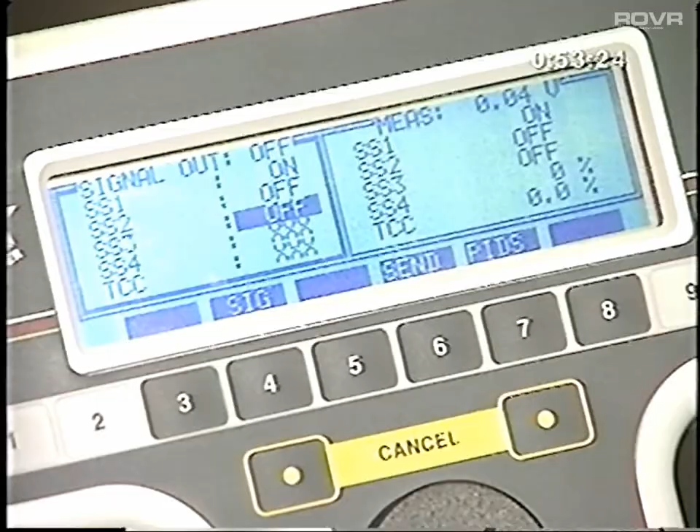Output state control enables you to override normal PCM control of the transmission solenoids. You can command the shift, torque converter, and electronic pressure control solenoids on or off to check their circuits. And you can control when shifts occur, a valuable feature when duplicating a customer concern.

The diagnostic procedures for the 5R55E are located in the vehicle service manual. To learn more about the 5R55E, refer to these TSB articles. 961724 describes the 5R55E's features and major components. 96185 tells what to do if you find an orange service tag on the pan of a unit you're servicing.

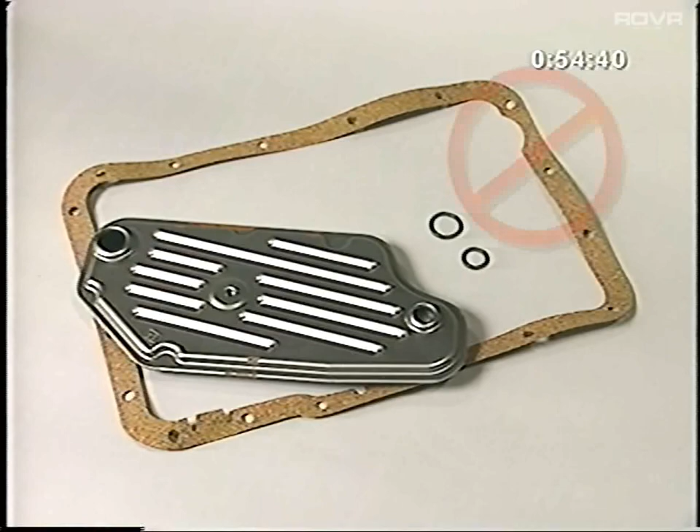To complete our discussion of this family of transmissions, here are three important reminders about topics that first appeared as TSB articles. TSB Article 96320 was issued to inform technicians that transmission screen and gasket kits F5TZ 7A098A and F5TZ 7A098B contain the incorrect pan-to-case gasket. When servicing a 4R44E or 4R55E, do not use the pan-to-case gasket that's supplied with these kits.

Using this gasket will result in a fluid leak. Instead, use gasket number F5TZ 7A191A. This gasket is thicker and contains torque limiters. New service kits are now available. Refer to the parts catalog for part numbers and applications.

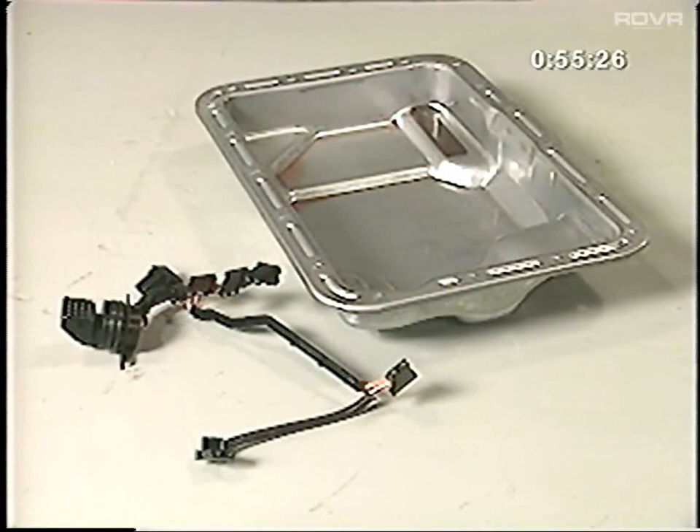TSB Article 96321 discusses the internal wiring harness change that occurred for 1996 4R44E and 4R55E transmissions. If the internal wiring harness on a 1995 or 1996 unit is replaced with the new version, the new, deeper fluid pan also must be installed to prevent wiring harness damage or a fluid leak.

TSB Article 96419 discusses transmission overhaul and seal kit F0TZ 7C391B. This kit contains some components that can be used only in the A4LD transmission. If parts unique to the A4LD are used in a 4R44E or 4R55E transmission, catastrophic damage to the unit or test equipment damage will occur. When using the A4LD kit to service a 4R44E or 4R55E transmission, unique parts must be ordered separately. This information is printed in the part usage charts in the TSB article and in the booklet that came with this videotape. New service kits are now available. Refer to the parts catalog for part numbers and applications.

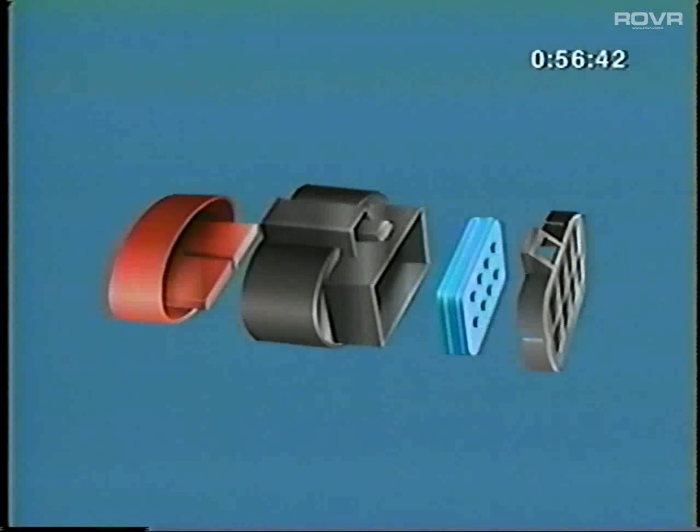When replacing a TR sensor harness connector, the rubber grommet located at the rear of the connector should be removed before any wires are pushed through it. We've learned that inserting wires through the grommet while it's still in the hard shell may cut the rubber and lead to water intrusion, contamination, increased resistance, and faulty signals to the PCM. To prevent this, insert each terminated wire through the back lock, then through the rubber grommet, and install the terminal in the hard shell. When all terminals are properly installed, slide the grommet into the hard shell housing, slide the back cover onto the connector and snap it in place, then install the red pin separator.

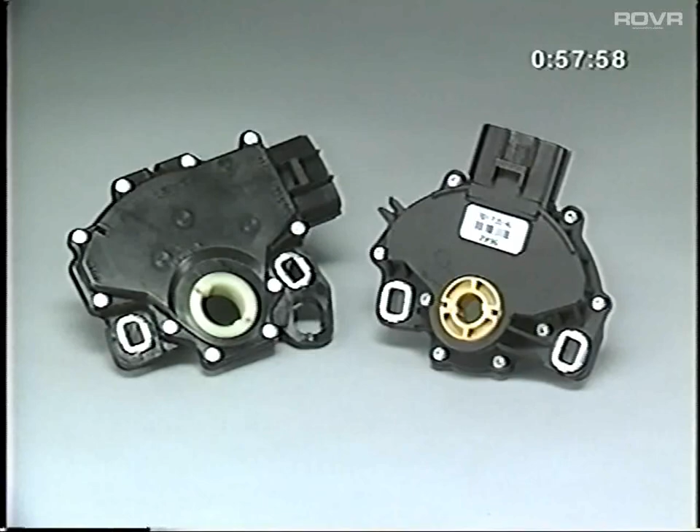To diagnose the digital TR sensor, use the transmission tester, the new digital TR sensor overlay, part number 007-00131, the TRE cable, part number 007-00111, and follow the appropriate pinpoint test in the service manual. To set up the TR-E cable, switch it to the digital setting and connect its black connector to the sensor. The transmission tester manual is also revised and includes all units and applications since electronic controls were introduced in Ford automatic transmissions and transaxles. All of the transmission tests also are located in the service manual for the application.

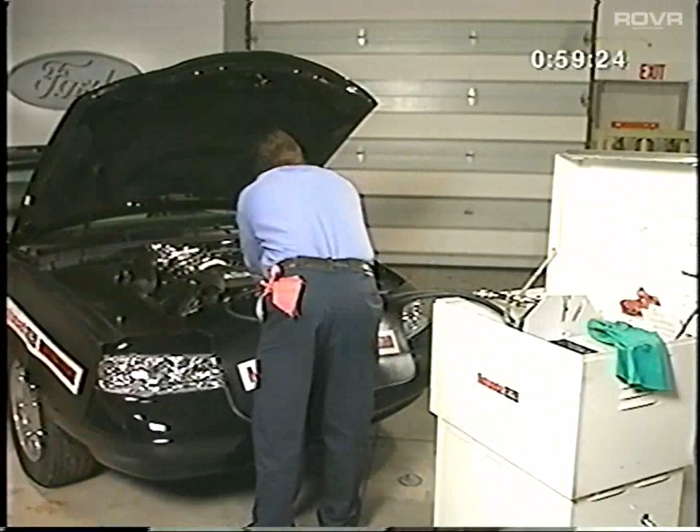When you're rebuilding or replacing a transmission or transaxle, cooler flushing is the best insurance against a repeat repair. Flushing with the right equipment, the Rotunda torque converter, oil cooler cleaner, or an equivalent machine, removes metal and fiber particles from the cooler so they won't contaminate the nice clean transmission you took so much care to service. Start the process early while you're completing reassembly, for example, and flush 20 minutes in each direction. When the job's done, blow out any remaining solvent with a light flow of air. High pressure air may damage the cooler's internal components. Also avoid using aftermarket flush-in-a-can products. They're no substitute for doing the job the right way, and they may damage seals. Use only the recommended equipment and mineral spirit-based solvent.

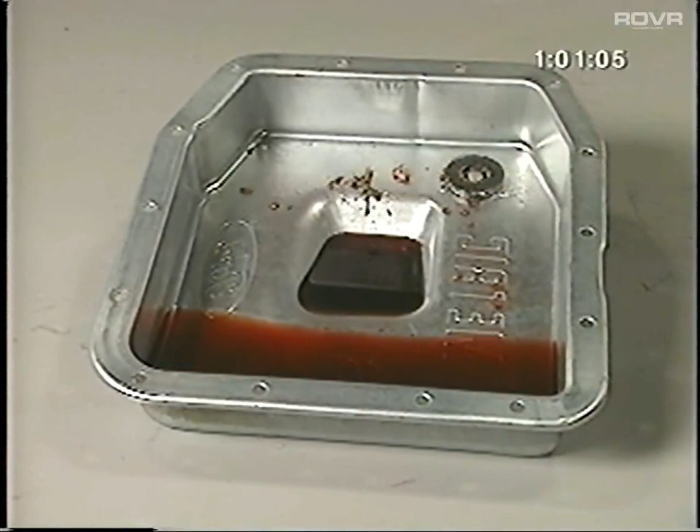Ford recently issued new guidelines which will take the guesswork out of diagnosing and servicing torque converter assemblies. These guidelines will be published in an upcoming TSB article and are reprinted in the program booklet. When the procedures are followed, fewer good torque converters will be changed unnecessarily. The diagnostic procedures will look familiar. They closely parallel the diagnostic flow chart that's been a part of the transmission and transaxle reference manuals for years. If a thorough diagnosis indicates that the torque converter does not function correctly, is damaged, or is excessively worn, it must be replaced. It also must be replaced if there is evidence of fluid contamination due to a major metallic failure, multiple clutch or clutch plate failures, or component wear sufficient to cause metallic contamination. After a torque converter assembly is replaced, the procedures require flushing in both directions of all coolers and cooler lines to remove contaminants, and flow testing of the transmission cooler.

A lot of techs don't realize that the time they spend diagnosing a concern can be paid time, that there's a labor code they can charge against, even if the diagnosis fails to pinpoint the root cause. If, after performing the diagnostic procedures in the service manual, you eliminate the transmission as the source of the concern, enter 'no problem found' on the repair order and charge labor code 7000F, electronic transmission diagnosis. Doing so enables you to be paid for your time. If the root cause of the concern is determined to be a component, the time spent performing diagnosis attaches to the part.

A number of passenger cars built between 1992 and 1995 and equipped with the AODE or 4R70W automatic transmission may exhibit torque converter shudder under light to moderate acceleration at speeds above 35 miles per hour. The shudder or vibration typically occurs in third or fourth gear or during a 3-4 or 4-3 shift. The root cause of the condition is automatic transmission fluid breakdown.

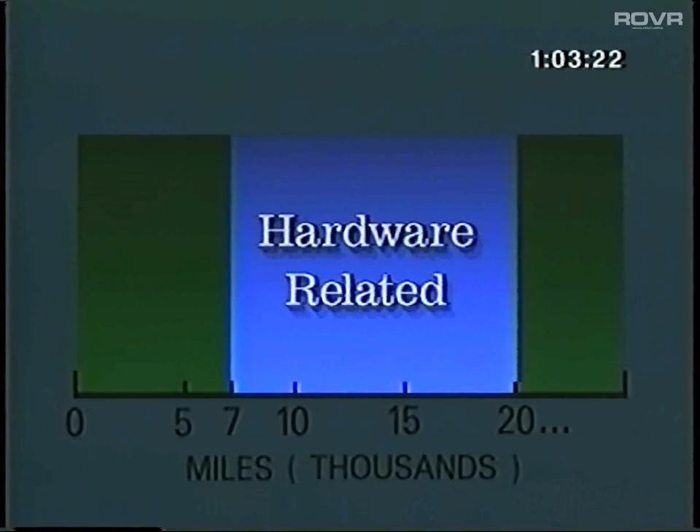If the shudder occurs between 7,000 and 20,000 miles, the cause may be hardware related. To service these vehicles, remove the transmission, replace the torque converter assembly with the correct service part. Reuse the transmission pan gasket and filter if they're not damaged. Then install the transmission assembly and fill it with Mercon automatic transmission fluid. Also verify that the fluid is not contaminated with moisture.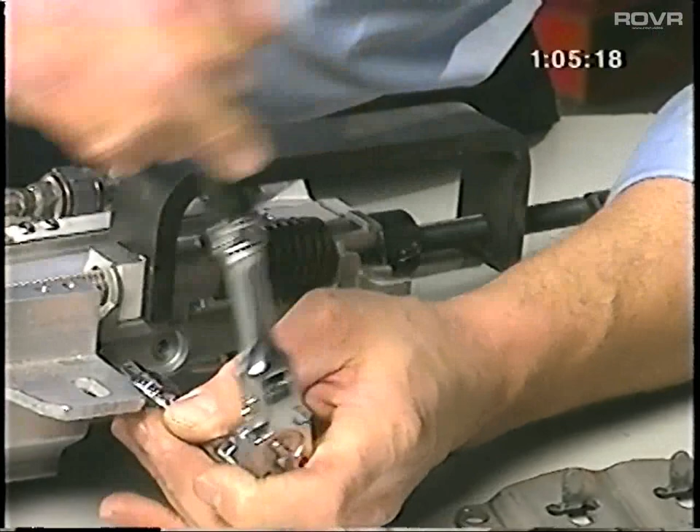Slowly turn the tilt spring compressor bolt counterclockwise to release the spring tension. Then remove the tilt spring compressor and the tilt spring. Continue the disassembly as directed in the service manual.

When reassembling the steering column, use the tilt spring compressor when you're ready to install the telescope actuator retaining bolts. Install the tilt spring compressor. Turn the bolt clockwise until the bolt holes for the telescope actuator align. Install the telescope actuator retaining bolts. Then, with the tilt spring securely in position, remove the tilt spring compressor. Continue reassembly following the steps in section 21104 of the service manual.

Some 1996 and early 1997 Taurus and Sable vehicles may exhibit a grunt or groan noise when the steering wheel is returned to center after a hard right turn. The noise may be due to the steering gear valve sleeve creating a noise that resonates through the steering system. To service this concern, follow the procedure in TSB Article 96.19.2.

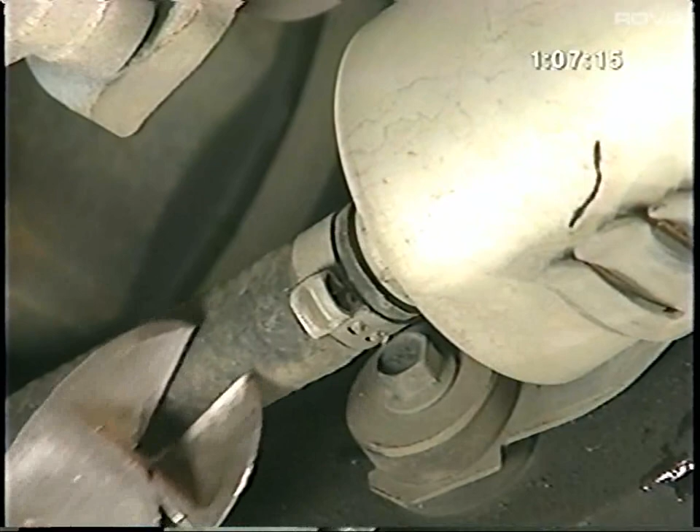It tells you to replace the steering gear to power steering filter hose with a revised power steering return hose, part number F7DZ 3A713AA. The revised hose consists of more rubber hose and less metal tubing than the original and uses an internal spring to dampen resonance. When removing the original hose, be careful not to damage the filter.

When you connect the revised hose to the filter, use only the clamp that's packaged with the hose. This constant tension clamp is designed to withstand the high fluid pressure in the system. The use of screw type or other clamps may lead to fluid leakage. If the bracket that's attached to the revised hose has a tab, bend it flat.

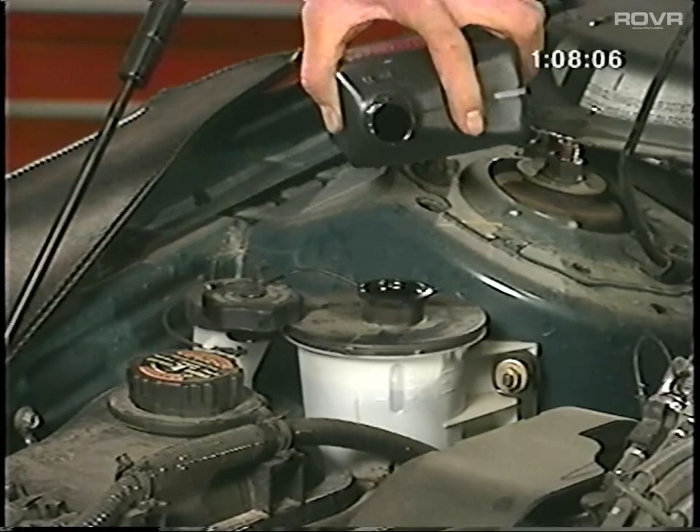This tab is required for installation in the 1997 Taurus Sable, but not for the 1996 models we're discussing. Be sure to attach the bracket securely to the subframe and replace the heat shield near the exhaust manifold if removed. On completion of the repair, refill the power steering system with Mercon multi-purpose automatic transmission fluid and purge air from the system.

The brackets that are used to secure the power steering lines are designed to prevent normal power steering sounds from entering the passenger compartment. If a power steering hose is incorrectly fastened or misrouted, it may touch body parts, heater hoses, or other components and transmit noise into the passenger compartment.

Customers may complain of a low-frequency moan or a growl when the wheels are turned, or a high-pitched whine when there's little or no pressure on the system. These noises may be mistakenly diagnosed as a failed power steering pump.

Before replacing a power steering pump that's probably okay, check the routing of the power steering lines. Verify that attachment points are tight. Verify that the system is filled with fluid. Make sure there are no leaks which might allow air into the system. And verify that the noise does not originate elsewhere with another engine component.

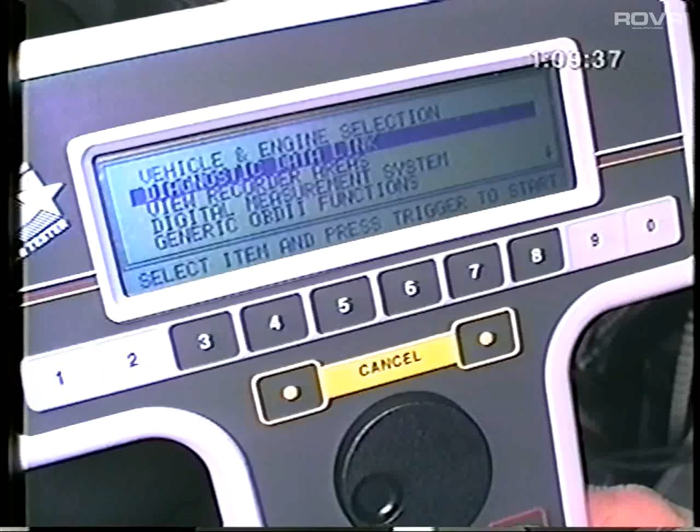Although evaporative emission systems are configured in different ways, they serve the same purpose: they prevent fuel vapors from escaping into the atmosphere. Because an evaporative emission system must comply with OBD2 regulations, it's closely monitored by the PCM for component failures and leakage. If a leak's detected, the PCM sets a diagnostic trouble code and illuminates the malfunction indicator lamp.

This program deals with a recent EVAP system design, the Evaporative Emission Running Loss Monitor System. We'll show how it works in a light truck application and demonstrate how leakage concerns are diagnosed.

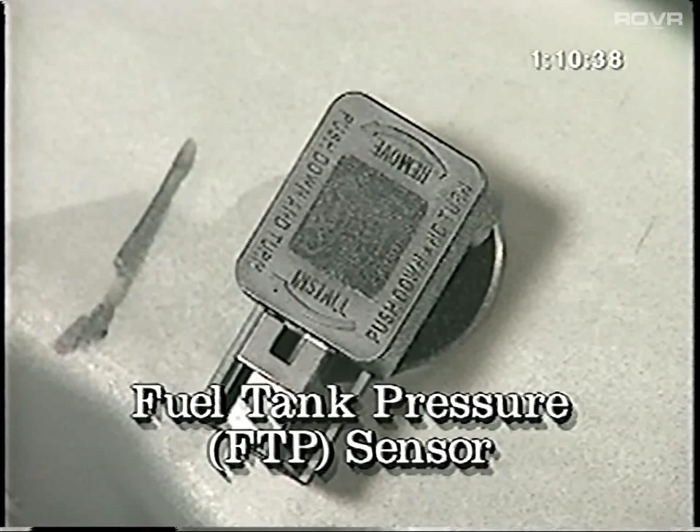The Evaporative Emission Running Loss Monitor System in this F-150 consists of these components: the fuel tank, the fuel filler cap, the fuel vapor valve, the fuel pump sender fuel level input wire to the PCM, two 1-liter fuel vapor storage canisters, the fuel tank pressure sensor, the vapor management valve, the canister vent solenoid, the PCM, and the connecting wires and fuel vapor hoses.

Vapors from the fuel tank and crankcase are continuously vented into the vapor storage canisters, whether the engine is on or off. The activated carbon that fills the canisters traps the vapors, preventing them from escaping into the atmosphere. When the engine is on and operating within a prescribed set of conditions, the vapors are purged from the canister and burned in the engine.

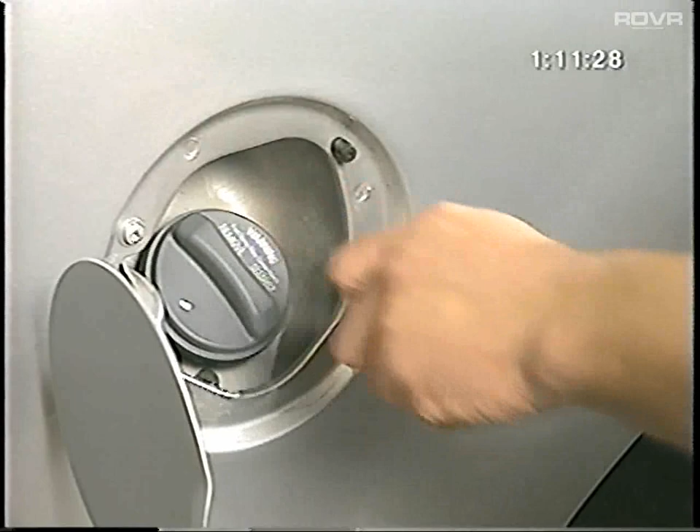The fuel filler cap seals in fuel tank vapors and prevents spills. If it's not tightened securely, or if it's been replaced with an aftermarket cap that doesn't seal correctly, the PCM will detect a leak when it runs the monitor test.

Fuel vapors are vented through the tank-mounted fuel vapor valve to the storage canisters. Although this is sometimes referred to as the rollover valve, it's actually two valves in one. The head valve portion prevents the fuel tank from being overfilled during fueling. The rollover valve portion prevents fuel from entering the vapor line that leads to the canisters. If a rollover occurs, the float closes when the liquid fuel reaches the orifice.

The fuel tank pressure sensor responds to changes in fuel tank pressure or vacuum. The PCM monitors the sensor's signal at key on, engine off, and while the engine's running. The input from the fuel tank pressure sensor is used during the EVAP monitor test to indicate if a leak exists. The PCM controls the canister purge rate by increasing or decreasing the duty cycle it applies to the vapor management valve solenoid.

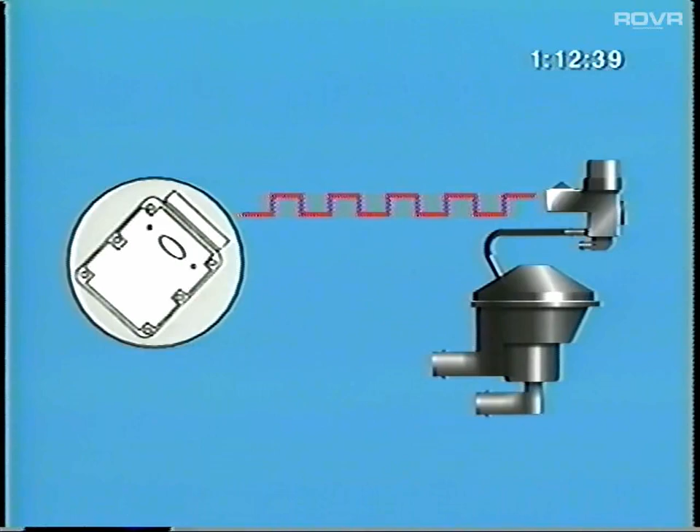When the engine is turned off, the vapor management valve closes, forcing vapors to flow to the canisters. The canister vent solenoid is used during monitor testing only. To initiate the test, the PCM applies a 100% duty cycle to the canister vent solenoid. With the canister vent solenoid closed, the EVAP system no longer has a source of purge air. As a result, intake manifold vacuum draws down the vacuum throughout the system.

The Evaporative Emission System Monitor Test detects component failures and leakage. Before the PCM starts the test, a number of conditions must exist. The pressure or vacuum in the fuel tank must not be excessive. The intake air temperature must be warm. The engine must be warm, stable, and running at a moderate load and engine speed.

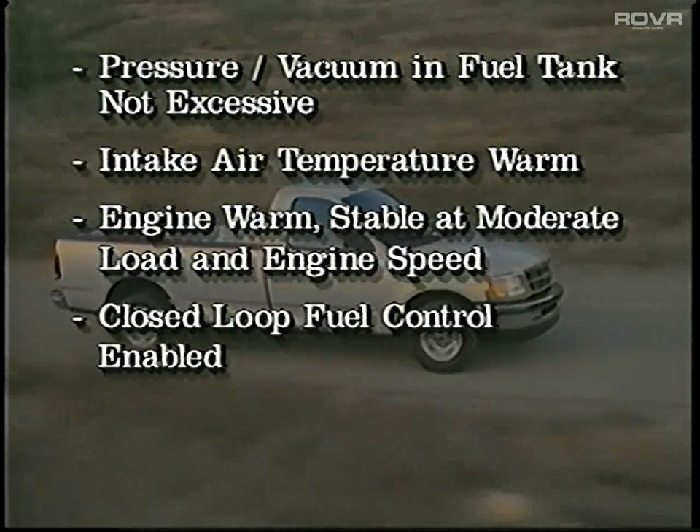Closed-loop fuel control must be enabled. And the vehicle must be moving at a steady speed, typically between 40 and 70 miles per hour, for a period of time. When these conditions are met, the PCM closes the canister vent solenoid but keeps the vapor management valve open to draw down the vacuum in the system.

When system vacuum reaches a predetermined level, the PCM closes the vapor management valve, sealing the system completely. By monitoring the fuel tank pressure sensor signal, the PCM is able to determine if a leak is present. A rapid vacuum loss suggests a large leak, while a slower vacuum loss suggests a small leak.

If the PCM detects a small leak, an opening of about 40 thousandths of an inch, it sets diagnostic trouble code P0442 and illuminates the MIL. If it detects a gross leak, the PCM sets diagnostic trouble code P0455 and turns on the MIL. The PCM also sets diagnostic trouble codes if a component or another system failure is detected.

Code P0446 is set when the fuel tank pressure sensor informs the PCM that pressure in the fuel tank is too low. The root cause may be a fault in the FTP sensor or its circuitry that results in false information being sent to the PCM, or conditions that physically block the flow of vapors, such as a kinked or blocked fuel vapor hose, a restricted canister vent, a damaged canister vent solenoid that causes the valve to stick closed, or a damaged canister vent solenoid filter.

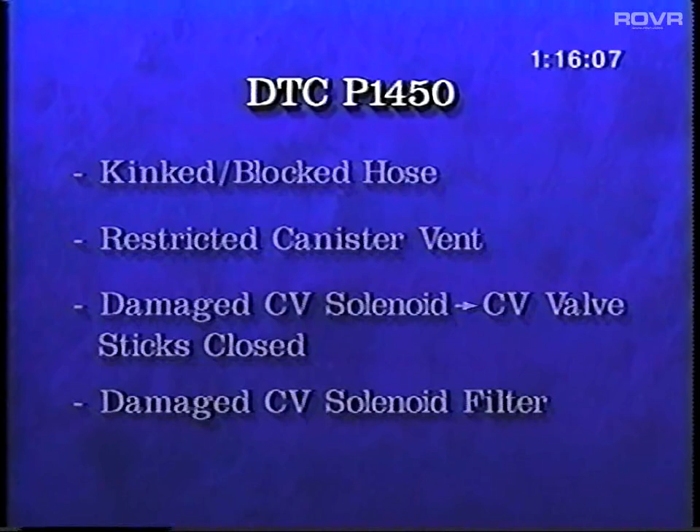Diagnostic trouble code P1450 is set when the system is unable to bleed up system vacuum after closing the vapor management valve. This may be due to a kinked or blocked fuel vapor hose, a restricted canister vent, a damaged canister vent solenoid that causes the valve to stick closed, a damaged canister vent solenoid filter, a damaged vapor management valve that causes the valve to stick open, an open in the fuel tank pressure sensor reference voltage circuit that interferes with communication with the PCM, or faulty signals from a damaged fuel tank pressure sensor.

Other codes will be set if faults are present elsewhere in the system circuitry.

To locate a leak in the EVAP system, use the Rotunda Evaporative Emission System Tester or an equivalent device. When using the tester, follow the instructions provided in the tester kit and refer to the PCED manual or SBDS for step-by-step guidance as you check the system. Also refer to SBDS and the most current CD-ROM for the latest diagnostic updates.

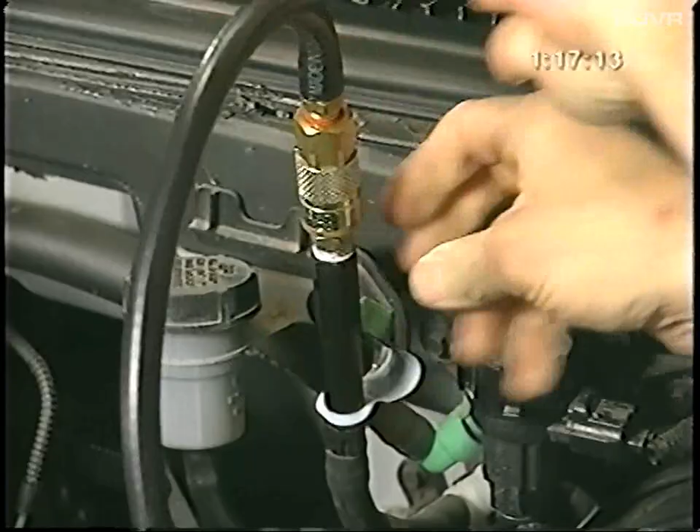Using an inert gas like nitrogen or argon, pressurize the system at the service port to the level specified in the PCED manual. Never use oxygen or any other gas that promotes or accelerates combustion.

Then check the hoses, connections, and fuel filler cap with the ultrasonic leak detector. Avoid using soap solutions like Snoop around the fuel filler cap. Some brands are known to damage the cap's O-ring, resulting in vapor leakage.

If a leak is not detected with the compressed gas fitting connected to the test port, attach the fuel filler cap adapter, repressurize the system, and check the test port itself—after all, it could develop a leak. After locating the leak, make the required repair, clear stored codes, and perform the EVAP monitor repair verification procedure.

When you've diagnosed an engine or transmission concern and conclude that a major repair or overhaul is needed, you can make the repair yourself—a costly and time-consuming chore—or you can call the people at the Ford Quality Renewal Program for a remanufactured unit.

Ford Quality Renewal engines and transmissions contain all the latest upgrades and are available for nearly all vehicles. A complete list is provided in your booklet and in the accompanying chart. If you're not quite sure when it's better to call for an FQR product or do it yourself, here are some guidelines to simplify the decision.

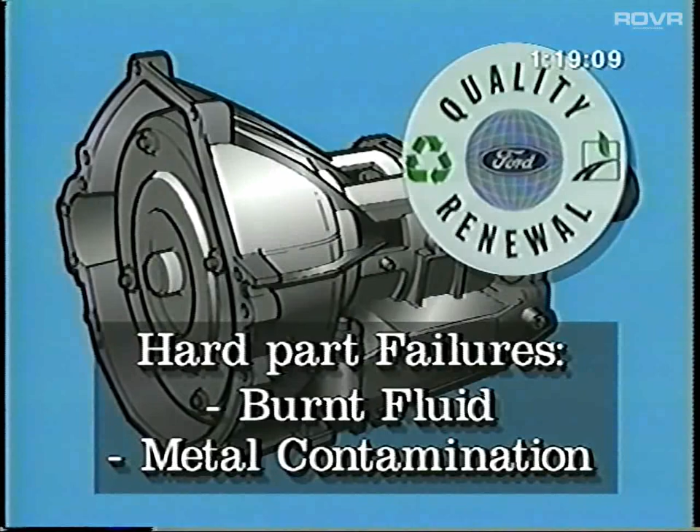After the Ford Quality Renewal engine or transmission is installed, there's one thing left to do before your work's done: fill out the paperwork and return it to Ford.

Here you go, Mike. Okay.

Looks good. Thanks. The diagnosis forms we get back from you help us track persistent concerns. Armed with that information, we can get engineering going on product improvement. If you don't tell us what your diagnosis turned up by sending back a completed diagnosis form, we're deprived of the best source of information we have—you and your fellow techs.

By the way, when you receive a CD4E automatic transaxle through the FQR program, it comes completely filled with transmission fluid. If you get a unit from the factory, you'll have to add at least 5 liters of fluid before starting the engine, then verify the level again—it may require more. Whichever CD4E you're installing, one from FQR or one from the factory, read any instruction sheets that come with the transaxle and double-check the transmission fluid level to prevent needless damage to the unit.

To help you fix it right the first time, Ford Powertrain Division supplies information specific to transmissions and engines through reference manuals and additional materials. An order form that fully explains these materials, including our comprehensive technical service bulletin manual, is included at the back of the program booklet.